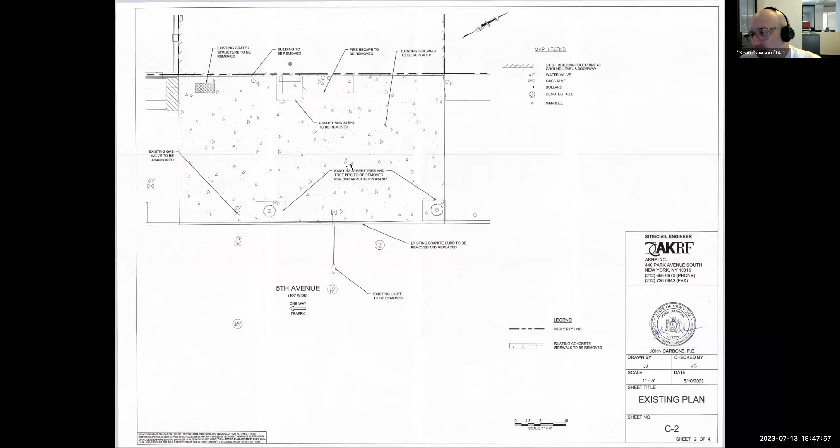Thank you. Anita Brandt. First, a quick question. What are the two X's? What do they mean on the plan that's on the screen? So that has to do with the previous existing conditions to the proposed conditions. So this is the current condition. They're basically just indicating the locations of the tree pits.

And one tree is being eliminated, is that correct? I believe both trees are being eliminated, yes. I'm sorry? I believe both trees are being eliminated. Logistically, given the back and forth with DOT for street furniture, the new street lights that are being proposed, and the spacing of signage, street lights, hydrants, the space is not adequate to maintain those street trees.

And one more quick question. There's an awning that's proposed under a separate application, is that correct? Yeah, that's correct. Part of the original application through Landmarks was a canopy awning at this entrance location. I can't understand. What did you say? I'm sorry. Did anyone else understand it? Maybe it's just me. Say it again.

So part of the original application through Landmarks, there is a canopy or an awning over the door at this main entrance portion, basically over the top of the same location as the snow melt. That has already been previously approved through the larger Landmarks application. That's what I wanted to know. Thank you. All right, Albert Bennett.

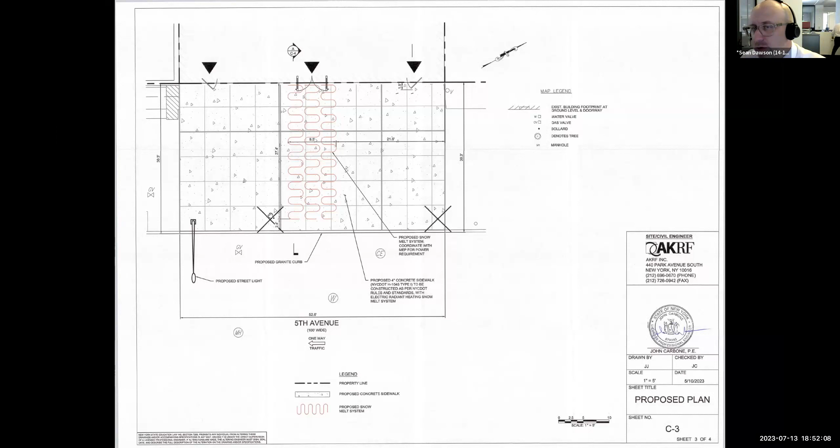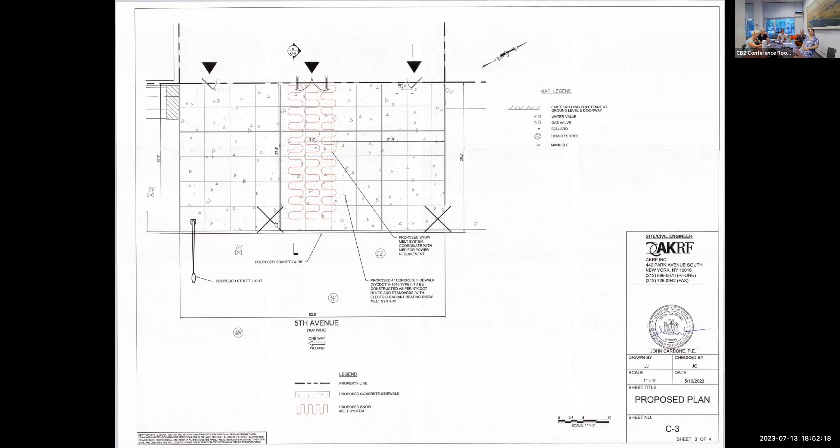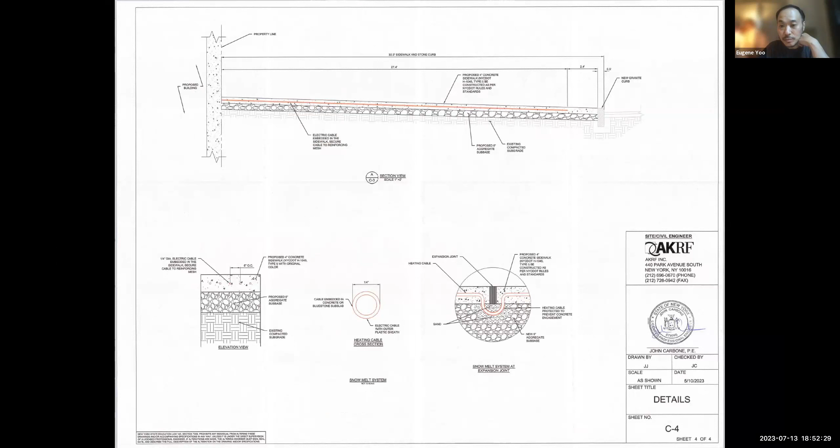Okay, are there questions from the public? Yes, there is one question. Eugene, do you see the raised hand among our attendees? Yes, Susan, I do. So Jeffrey Rowland has a question. Jeffrey, I am going to promote you to panelist if you would like. No, I don't need that. I'm perfectly satisfied with just speaking. You can hear me, I hope. Yes, we can hear you, Jeffrey. Okay. I have several things that I would like to say, and some of them are questions that will need to be addressed.

The first thing I would like to make the committee aware of is there was an article yesterday in the Times about the underground temperature in Chicago having risen by 5.5 degrees in the last 50 years, precisely because of the heat produced by buildings and the basements of buildings. So put that aside for a minute. That is something to maybe talk about.

If there is an awning in front of this building, what is the need for the ice melt under the awning? It seems to me that it's redundant, and it may contribute to the heat of the ground, and that has an issue in terms of shrinking and swelling the ground and raising and lowering buildings and actually causing cracks in adjacent buildings. That's something I'd be concerned about. Two, I would like to know what the power is used in this. What's the wattage and the amperage for the entire feature, and how will it be addressed to age?

In other words, people get electrocuted sometimes with salt and things like that that get spilled on the sidewalks from other buildings or tracked there by boots and galoshes. And should the decay happen to the wiring, there could be electrical leaks. I know somebody personally that was electrocuted trying to save their dog over in the East Village, Jodie Lane. Some of you may remember the famous young woman that was electrocuted saving her dog because her dog was getting electrocuted. She went to rescue her dog and she herself got electrocuted. And this from Con Edison's electric leaks.

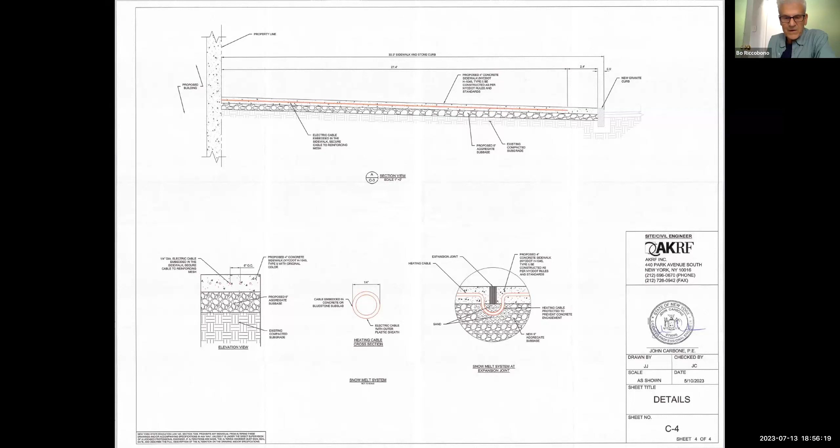Okay, thanks. The next application is 38-42 Commerce Street. Chanel, excuse me, Chanel, Valerie De La Rosa has a question too. Yes. Does Local Law 97 or Local Law 84 or 87 cover any of the heated sidewalks? Have you had to look at those to address this? And then I just have a general statement. My understanding is this is all electric, and those are concerned with carbon uses. So thank you.

And I would just say a general statement is if I understand this isn't a historic district, and this is just a general comment as part of being on the committee. If we're not here to comment on the trees being removed or the energy use underneath the sidewalk, then does this need to be looked at by another committee? I just offer that as a question to the committee to think about for business session. Thanks. Thank you, Valerie. That seems to be it, Chenault, so we can move on to our next application now.

Okay. Thank you. Eugene, if you'll rearrange the presenters. Yes. 42 Commerce Street. The application is to install a new entry infill, signage, and to repave certain areas. Yes, so this is 38-42 Commerce. So I will be promoting Erin Ruli. If there is anyone else associated with 38-42 Commerce, please raise your hand so I can promote you as well. Okay, so we have three people rejoining the meeting as a panelist.

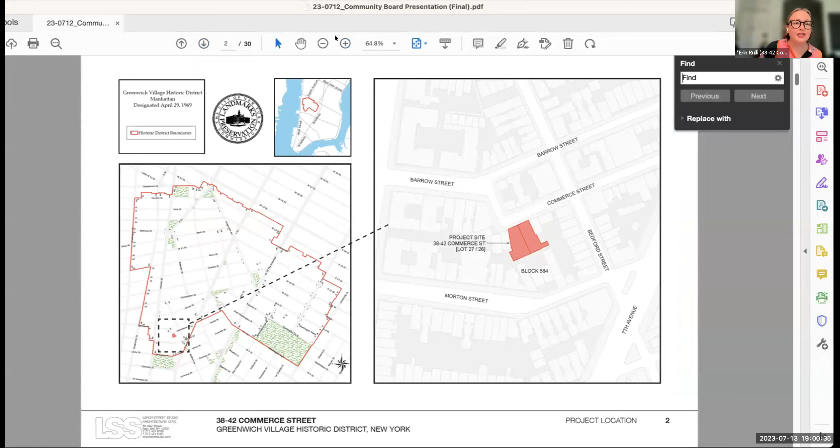The application is actually for two separate buildings. It's 38 to 40 Commerce Street and then 42 Commerce. Those are buildings located on the south side of Commerce between Bedford and Barrow Streets in the Greenwich Village Historic District, of course. Here we see the overall scope of work, the existing conditions on the left and the proposed conditions on the right. As I mentioned, these are two separate buildings historically. The building on the left is number 38 to 40. That's primarily the theater building. And then the building on the right is number 42.

That historically was a restaurant associated with the theater and then was converted to a black box theater later in its life. But originally constructed as early to mid 19th century buildings, and then converted to a brewery, and number 42 was a stable. You all likely know the history of Cherry Lane. It was a longstanding off-Broadway theater. The property has recently changed hands, and A24 is the operator. It will continue to operate as a live theater venue, as well as hosting screening events.

As part of this proposal, interior work converts that black box theater back into a restaurant, much in keeping with its historic condition. The intent here is to really have a very light touch. It's a minimal intervention that's inspired by the historic condition. We'll see that throughout the presentation. And all of the interventions are to non-historic or non-original conditions. So just briefly to run over the scope, there's new infill at the stable entry at number 42, which we see here. Can you see my cursor on the screen or no? Yeah, oops, sorry.

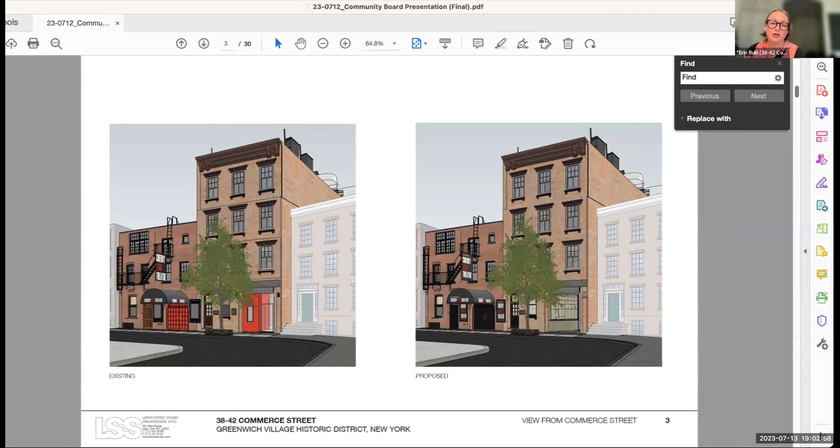Replacing the window at the center bay here. It's currently a vitrine. There's new poster boxes replacing the existing, recladding the existing canopy, and then new signage and branding associated with the proposed theater operation, and then refinishing the existing painted features in a consistent black finish across the facade, which resonates both with the historic condition, but also with the upper floors. And so we'll take a closer look at all of that.

Here's just the overall condition, looking in both directions, east and west. The existing conditions largely result from a 2005 approval by the Landmarks Commission for a theater rehabilitation project designed by Mitchell Kurtz. And so the red box office that we see within that open bay here, the red doors, the doors themselves, all of the signage, that was all approved as part of that project.

So then just looking, I can zoom in here. You just let me know if you want to see something close in more detail. But here's the existing condition at number 42. So looking sort of frontal view, this is the existing box office that was built as part of that 2005 project. Some glazed infill that opens onto the lobby beyond. And then that vitrine I mentioned, which will be replaced by a standard double hung window, and then those poster boxes that flank the existing theater entry.

And then just oblique view looking into the recess, the open vestibule. This was a stable entry historically, so you can see the sort of expressed brick return within the opening. There's some signage in there, and you can see sort of beyond that with the glazed opening. Of course, in off hours, the theater is shuttered, so there is a security grill that extends down, and this signage dates to that 2005 project as well.

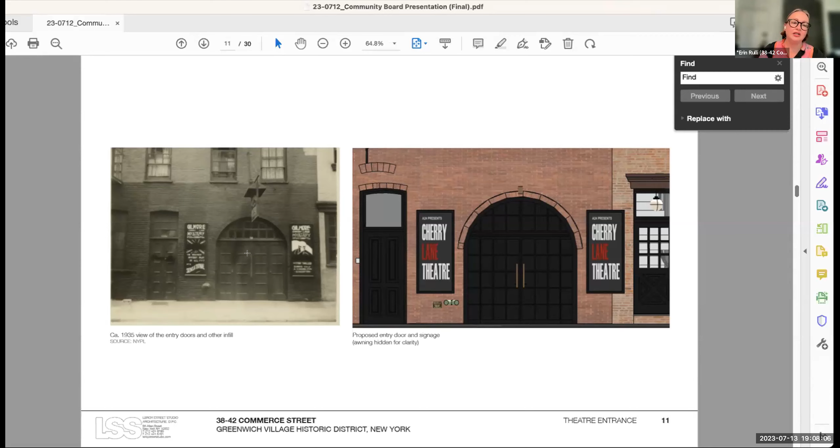And when Landmarks approved the infill, so the doors within this arched bay were approved in 2005, they're recalling the doors that are shown here. So we think that this all sort of brings it into alignment to have the signage and infill to be of a compatible generation.

So in plan, on the left is the existing condition, on the right is the proposed. We can see the masonry opening at the building line, and here's the existing box office, that red box within the masonry opening, and then the glazed entry there, just set back behind the masonry opening, and then that leads to the lobby, and then this is what was the existing black box theater at the rear of number 42.

And on the right, we have the current proposal, which sets back the entry quite a bit more deeply within the volume of the interior space, and creates more of an open reading, recalling that historic openness that existed there. And then the box office and concession stand, it would draw behind the masonry opening. So here you can see that the box office sort of juts out into the opening, but this sort of curves back from the masonry and extends back into the lobby.

And that gives you, again, reinforces that open reading of the vestibule, but that curved form also recalls that sort of historic procession through the space. And then you have the open lobby beyond that, and the restaurant at the rear of the property. There's also an entry into the theater from that lobby space. And so in just thinking about the design, it's really inspired by that open courtyard that existed historically, both as a stable and then later as the restaurant once the Cherry Lane was established.

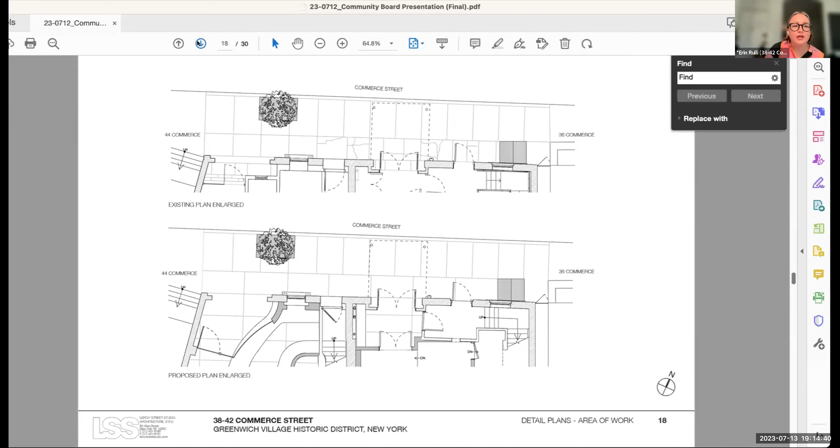Here's the existing box office and entry infill, and we can see how that really opens up in the proposed condition. At the building, there are fragments of bluestone paving that exist, and we see that here in green. They're also represented in the photographs above, but it's really fragmentary and they're in very poor condition. And then it's surrounded by concrete.

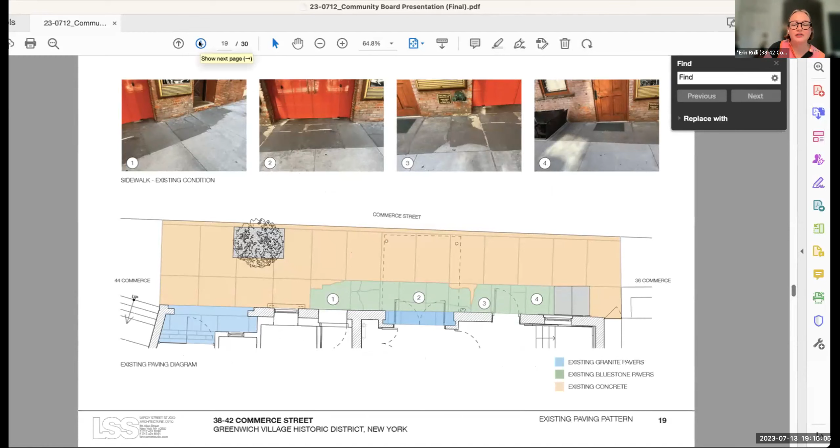And then at the thresholds, we have some granite that was part of that 2005 project. And here's the proposed condition. So a new line of bluestone paving all along the frontage of the building and leading into both the theater vestibule and the open vestibule leading to the restaurant and the primary lobby. And so really just extending the experience of the openness of the original stable condition and the original restaurant, and that permeability between the theater and restaurant and the street.

And here's just an overview of all of the materials that have been selected. The unlacquered brass light fixtures. We have the black paint for all of the painted surfaces at the ground floor, and then the infill, green glazed brick, to give texture and reference to the existing brick with a subtle contrast and recession within the opening.

This is the slide I'll leave you on, but here we see the evolution from the pre-designation photo showing the existing condition at that time, how we experience the building today, and then on the right, the proposed condition, which, as you can see, has a very light touch and is minimal in all regards. So with that, whatever questions you might have, I'm happy to answer.

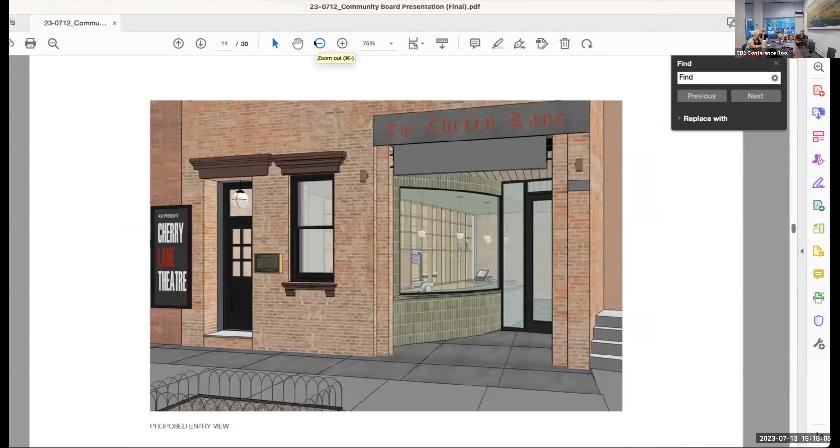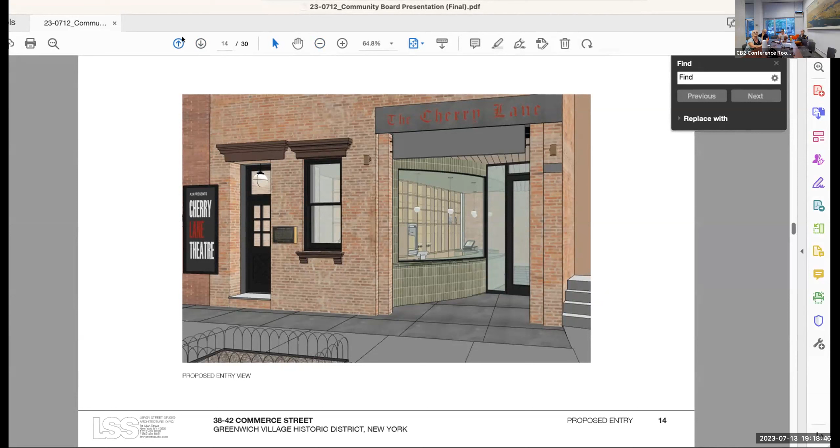That's it. Thank you, Susan. Okay, Anita Brandt. Yes, thank you. I have two questions and also a general comment. I think it's really very nice. I liked it, so congratulations on that. And I also like the way you handle the bluestone. My questions are, number one, would you consider finding a way to recess the grill box? We're trying to get away from those boxes that house the grill. And the second is, are all the windows on the actual facade existing, and are they wood?

Okay, so the grill box, are you talking about the poster box? No, the roll-down grill. The grill box is, let me go to the section. Okay, so the grill comes down behind the masonry opening. So it's recessed from the plane of the facade, but it is directly behind the opening. And from a security perspective, it's important for the operator not to have an open vestibule during off hours. Of course. No, I'm asking, why can't you recess it up into the ceiling so you won't see the housing?

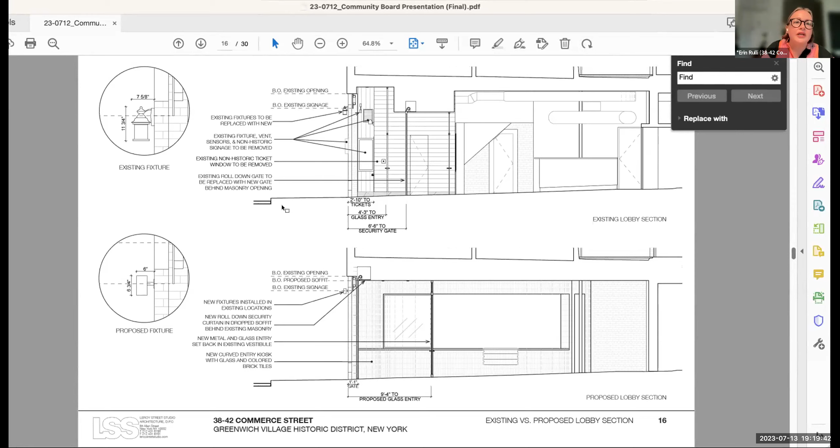I'm sorry. In fact, it's recessed up into the ceiling here, and then there's a signage bracket that extends across the whole width of the facade that's occupied by signage. So that'll all be housed. It won't be visible in any way, and it'll have a clean appearance on the interior when it is open. Well, you made the sign look like a box on the renderings. Anyway, I understand it now. Sorry, this is Morgan here, from Leroy Street Studio.

It's an existing sign there, which, yes, there you go. Yeah, so let's see. There's maybe this one. Your rendering has the sign above it. Yes. So it's almost like theatrical bracing that exists within that opening. I'm trying to get to it. There you go. So you see this framing exists there, and then it mounts banner signage on it based on whatever is happening at the theater at that time.

And so that's remaining. And what you're going to have is, let's see if I can jump to this. What you're going to have is this condition at the street. And you can't really see, but the ceiling level is 8 inches, a foot above that. So it'll all be housed up in there. You won't see an expressed housing. I think you understand my comment, right? I do, yes. And your answer, but I think this would be a good time to make an improvement there, in my opinion. And the wood windows, are they wood, and what's the wood?

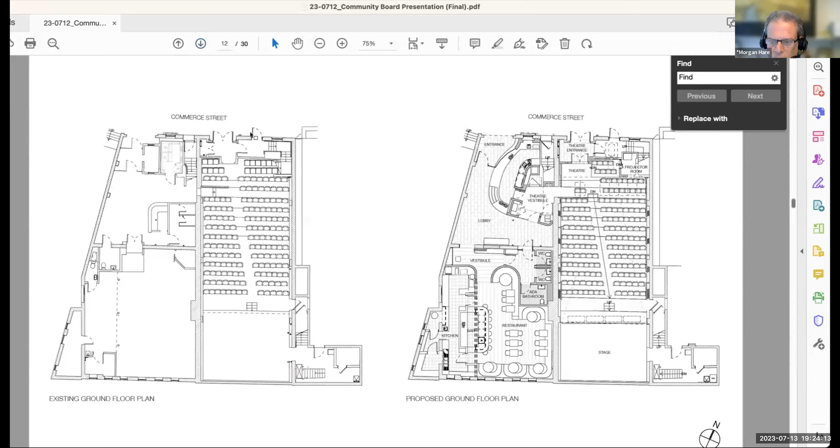Okay, Brian Page. Thank you. Yes, it's a great presentation, and generally, I think it's a big improvement. 2 questions. One is, aren't you required to have the egress door from the apartments to swing out? Morgan, do you have that one? Can we go to the apartment? Oh, sure. The plan. That's the best place, right? I was going to say the photograph, but that's okay too. Oh, yeah, right. I mean, we're not touching any work there. This is the existing. But yes, you're right. It is a requirement.

Yeah, you're touching the entire facade, so I don't think you could use that as an excuse to not improve the safety for the apartment. Yeah, no, it's purely an oversight. We're not doing any work on the apartment because they're rental units. So yes, you're right though.

My second question is on the box office of the new plan. I didn't see any openings in the glass facing the outside. That is outside of the entry door. So we're using the new double hung window as the box office on the street, as opposed to the old version where the box office was in that red box. Was the opening in the red box. The curved section is solid glass. Correct. Right. Thank you.

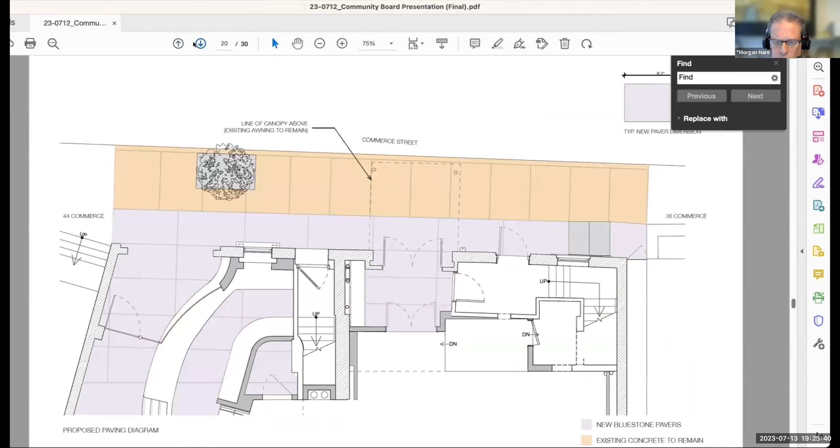Thank you. While we're on the curved section, I have a question about the green glazed tile. What is the finish on that tile? It's kind of a matte finish. It's bison brick, which, do we have a photograph of it? Yes. There it is. And it's kind of a matte glazed. You've got it over on the right there.

Sorry. There you go. Can you see that? Yeah. It's a matte glazed brick tile.

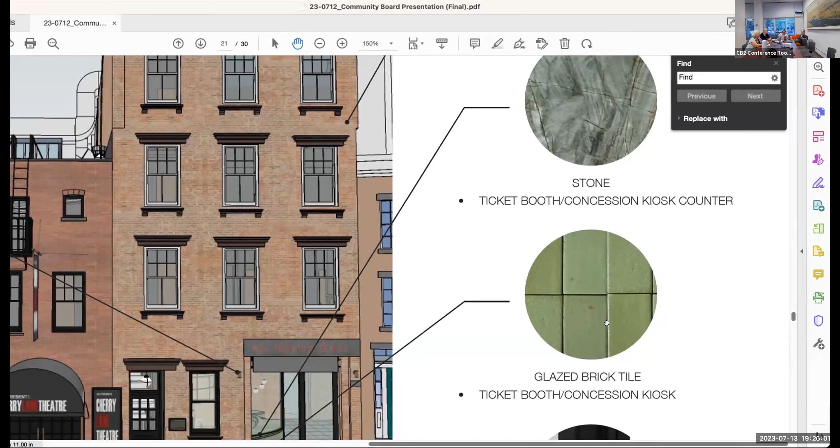Okay, thank you. And I have one other question, which is in regard to the brass light fixtures. What is the inspiration for those fixtures? They look a little contemporary. They are; it's a little more contemporary in look than what is there now. They're a nicer fixture. The fixtures that are there now, although they appear historical, are a little flimsy. They're not great. They're sort of dented too; people have hit them over time. They are very flimsy. Yeah, no, my question isn't in regard to the existing ones.

It's your choice of. Yeah, we like these because they were a bridge between the existing fabric and the new theater. It didn't feel like it was too modern, but it's not overtly traditional. And they're also just scaled down. They're compact in profile and projection, and have a minimal impact on the overall aesthetic. Thank you very much.

Albert Bennett. Yes. So basically, we are losing a black box and gaining a restaurant. Is that correct? Well, I would say that the black box was established in the 1990s. You are gaining a restaurant, but it was historically a restaurant. From the inception of the Cherry Lane, it was always a restaurant until I believe the 1990s. It might have been transitioned before that, but it was very much a pet project of the previous operator that created that space in the back.

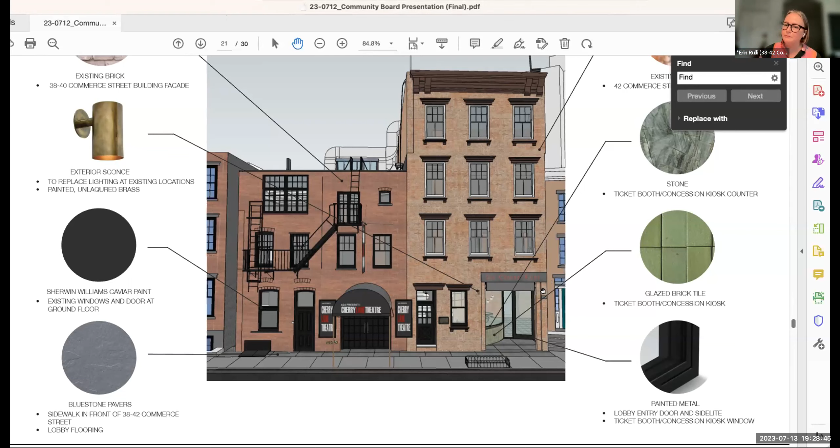Exactly. Let's get to that view. This one here. Yeah, so it's all very subtle and understated, but very much in the experience of how you walk Commerce Street, right? If you experience that curve, it feels like the right place and the right level of identity. Even though there has been much more signage over the course of the building's history, this is very much resonant with the place, I think.

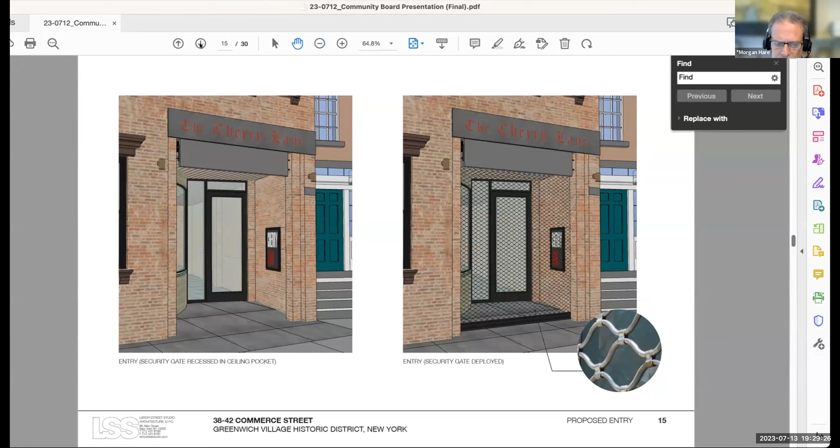And unfortunately, I'm sorry, we didn't get the image of the sign on this rendering. The one on the building, the right. It's essentially, oh yeah, this is the impost of the pier, but it's essentially that level of signage. Let's see, do I have it in the historic photograph? Yeah, there it is. There's a little plaque sign on the pier, and that's what we would be recalling. Okay, thanks. Have all the questions been asked?

No, they haven't. Susan Kent, followed by Brendan. Thank you. My question is somewhat similar to the previous one. That black box space that you are now converting, was that an active theater space that you're now sacrificing? Or was that just a rehearsal space? It's just that a theater giving up theater space is kind of surprising.

Up until the transfer of the property, I don't know how active it was prior to the sale, but it was constructed as a black box space. I couldn't share with you the level of activity of how programmed it was. But it's not actively programmed. Is that the reasoning behind replacing it? Morgan, do you have clarity on that?

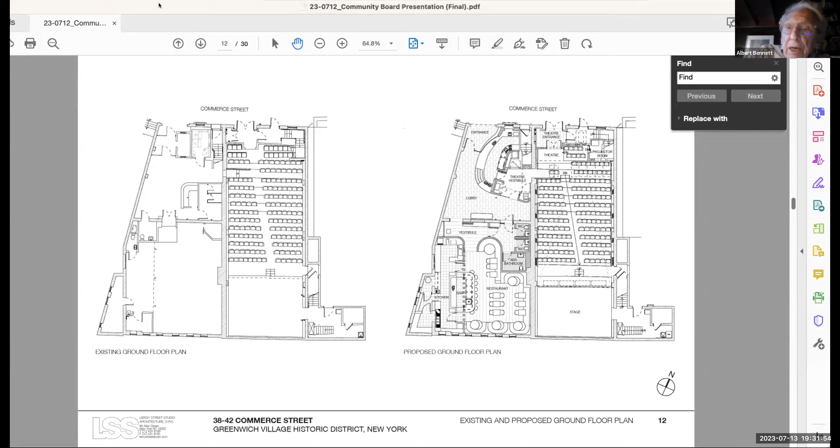Could I speak to that? Every play I've been to has been in the other theater. Right. Me too. Okay, could this be the last on the question of the interior? Albert, please. This is not a question. I just want to state that not very long ago, a friend of mine from Chicago came to perform in that space.

Okay, thank you, Albert. Wait, I think we have all apart from— sorry. Mary Gerloff, who is a long-standing part of the Cherry Lane institution. I don't know if she can raise her hand and speak. She could speak to how that space was used, up to the most recent history, if you desire. Yes, and Mary Gerloff is in the panelists, so she can definitely speak. Mary, maybe just raise your hand.

She's telling me it was an active space. So it's an interior question, and we should move on with what's before us. She is saying that it was an active space, but we know that this is an interior use question, so we'll move this along. And Brenden Fitzgerald has been very patient. Brendan. Thanks, Erin. I have two preservation questions and then one design question.

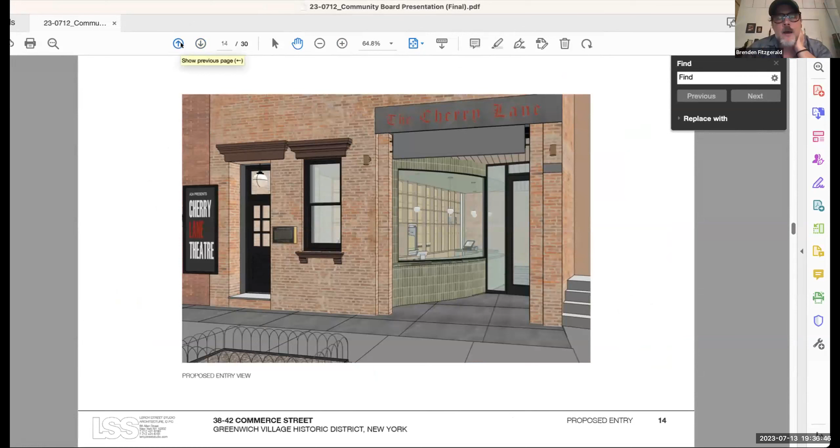But there is one, I'm not sure where it is, but it was red letters with a white highlight, I think. Yeah, that was a rendering that y'all made, right? Yeah, I'm not sure, that's a possible treatment. No, that one is just showing the red. Okay.

And then moving next is the entrance way. I just want to confirm that glazing is slumped, curved. And then I guess my question is, is that critical to the design vision? Certainly it does pronounce that it's not part of the historical building, which is good. I'm just throwing it out there. Again, I don't have an answer to that.

You're asking about the glazing itself or the whole wall? Oh, the wall, I'm actually talking about the glazing itself. It is slumped and curved, right? Yeah, that is correct. I just wanted to bring that up. Right. We looked at it as segmented, and it just felt like it was a third thing. Faceted. Yeah, faceted.

And it just felt the curved form really kind of signaled this new box office piece as a piece separate from the existing fabric. Okay. Thank you. I see that Mary Beal from Cherry Lane Theater has joined us. So Mary, please go ahead.

Hi all, nice to be here. My Zoom froze, apologies. I'm here for any questions about the theater. I believe there was a question about the studio theater being active to the public, I think was the question. Yes, from about 1996 to 2022, it was an active studio theater. Thank you. You're welcome.

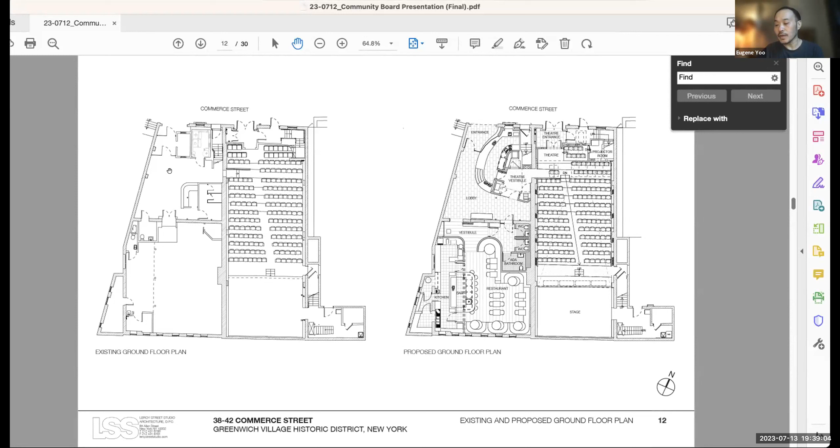All right, Chanel, there are a couple of members of the public who would like to speak. Okay, I'll just go through one by one, please. Sure. So Jeffrey Rowland is first and Pete Davies will be next. Pete, I will be allowing you to rejoin as a panelist if you wish. Jeffrey, you can speak as last time. Thank you. And Jeffrey, you're first. Okay, thank you.

I listened to this very proposal in front of the SLA a while ago. I don't see many changes that are significant. I thought it was excellent then. I think it's excellent now, and I think historically appropriate. I might add that I think you'll find looking around in the village that almost all historical residential entrances actually open in. The commercial ones open out. I don't think it's a requirement that the residential ones open out, or otherwise my building and every building I know on the block would be in violation.

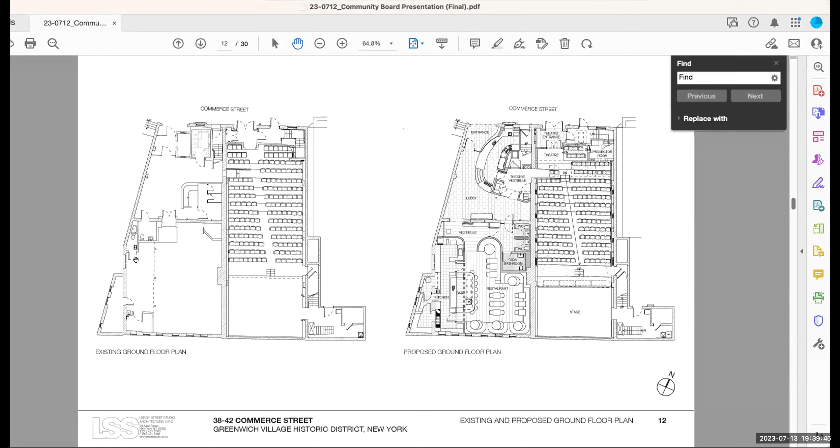I think that the signage, the Cherry Lane sign that's faded, I'm in favor of restoration to the current condition. In other words, not some previous signage, but the current one just restored to its condition, so that it will in fact be able to endure over a long period of time. I think if left in the condition it is now, it likely would fade away to the point that nobody would care that it was there. And so I'm inclined to say restore. Thank you very much for the time.

Thank you. And Eugenia, Pete Davies is next, yes? Yes, you're right, Susan. Thank you, Jeffrey. And Pete, I see you on the screen. Very good. Thank you very much. Could you put up slide 16? This one? It's different. I'm so sorry, what was it, Pete? It's the one where side by side you see a photo of the poster with the red arch door to the left. Oh, yes. There you go. And on the right, you see the rendering.

Okay, so I'm confused because on the left, that photo shows the width of the 40-42 portion of the building that's behind the sign to be 1 brick wide. But the rendering shows that portion of that same building to be 2.5 bricks wide. And all of your renderings show that extra width, whereas the photo and Google Street View show 1 brick width. So with what you show now on the rendering, the division of the buildings kind of meets middle-ish of the poster, but when you lessen the width of that poster box, it's going to sit differently. I'm just confused as to why your rendering doesn't comport with the actual situation with the facade.

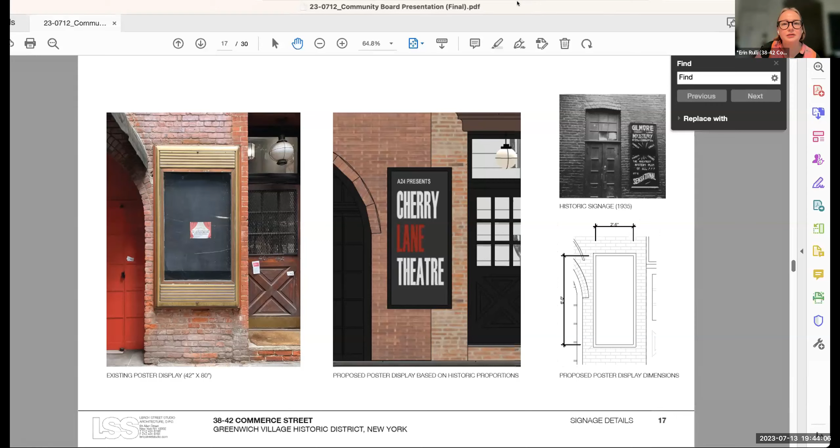Should I stop sharing now? Is that? Yes. Yes, thank you, Erin. Thank you. If you would rearrange people, please, Eugenia. Thank you. Yes, we'll rearrange the deck chairs.

So the next application is 829 Greenwich Street to alter the facade and construct a small rooftop addition and rooftop solar panel canopy.

Yes, so I am promoting Jonathan Taylor for 829 Greenwich. If there is anyone else in the attendee list, please raise your hand for 829 Greenwich. Okay. Yeah, this is Jonathan, and Alexandra Barker will also be one of the main speakers, so for sure, I want to make sure she gets promoted. Yes, promoting 3 additional speakers. Okay, good. That should cover everybody. Thank you. I'll go ahead and share. And so should I begin? Please do, thank you. Great.

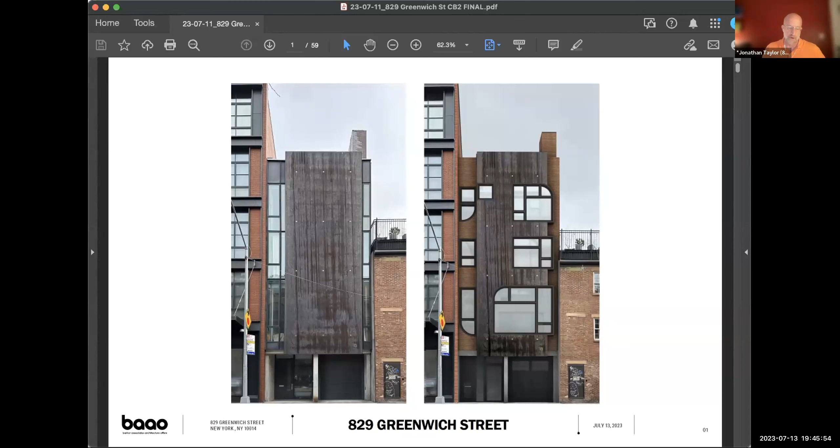Hi, I'm Jonathan Taylor with Higgins Quasebarth & Partners Preservation Consultants. I'm joined by Alexandra Barker and Annie Paz of Barker Associates Architecture Office, as well as my colleague Erin Rulli, who you just heard from. We're here to present modifications to 829 Greenwich Street, which is a residence that was approved by the Landmarks Preservation Commission in 2003. The modifications are part of a project that was conceived to comprehensively address building performance issues inherent in the original curtain wall and steel plate facade design.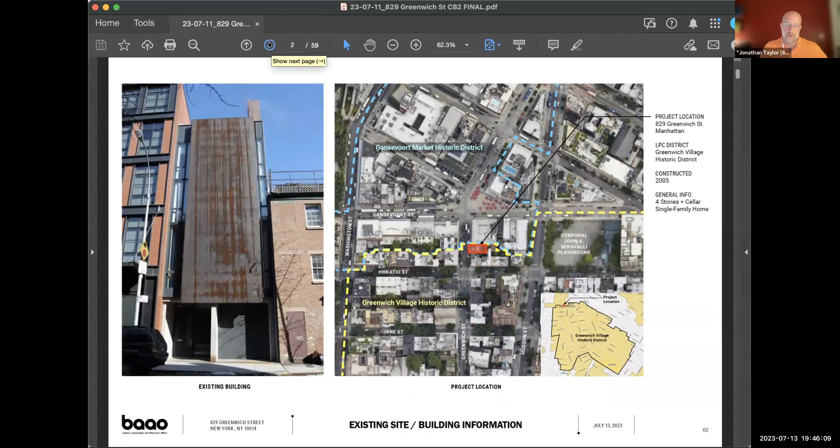The house is located between Horatio and Gansevoort Streets, on the Greenwich Village District's northern border with the Gansevoort Market Historic District. These are a few street views of the building on Greenwich Street. The street facade is composed of a steel plate that is set asymmetrically forward of a curtain wall window system that runs up each side of the facade. At the ground floor are a deeply recessed entry and garage door.

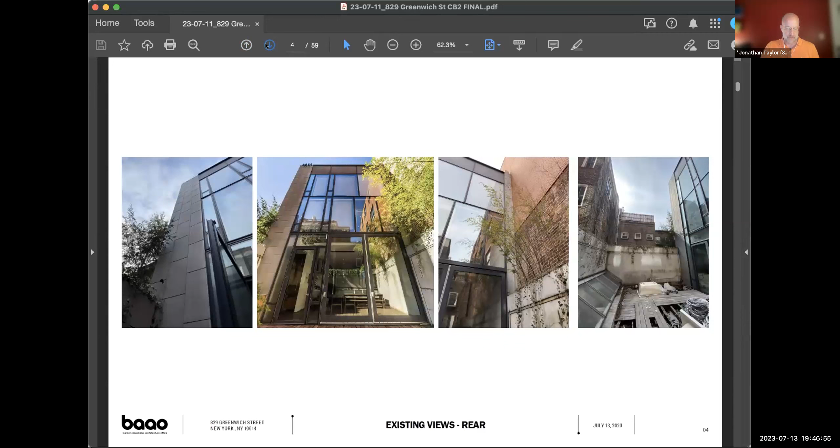And as you can see on the right, the south side elevation is partly visible with a red brick chimney and a large angled skylight. At the non-visible rear of the building, the rear facade is largely made up of a massive window wall. And there's also a small rear yard with skylights to the basement. Repair and replacement of the decking and skylights are being reviewed by LPC at staff level. Some views on the roof of the building with the existing large skylight and the existing chimney. There's also non-visible mechanical equipment that's going to be replaced.

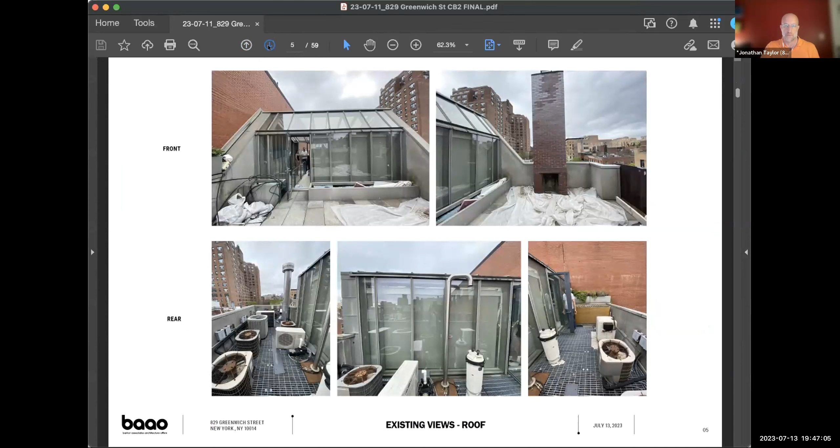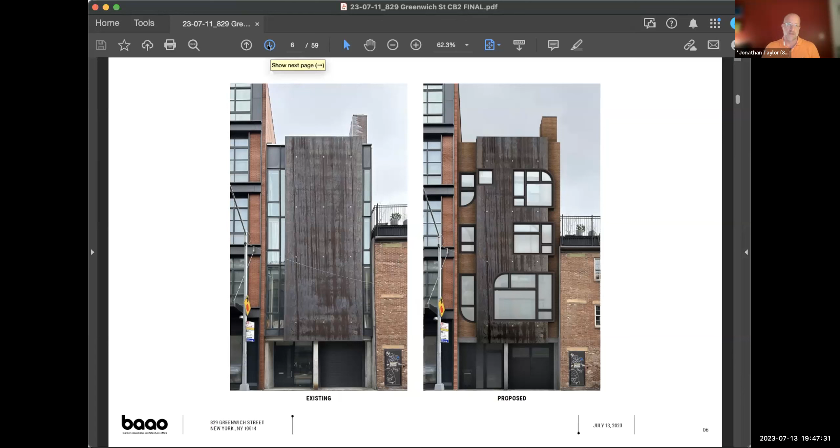Alex Barker will discuss the proposal in detail, but I did want to show a few overview images of the project before briefly discussing the site history and context. The proposal entails on the front facade introducing new larger window openings that intersect with the steel plate and cladding the setback portions of the facade in brick. The entry infill is to be brought somewhat forward, but remain set back from the facade. And just a couple of other street views of the proposed rendering.

At the rear, it's proposed to replace the window wall with a stucco-clad rear facade with punched openings for windows that echo the design of the front facade. The angled skylight is to be replaced by an angled solar canopy. And at the southeast corner of the rear of the building is proposed a small greenhouse, also with a sloped roof. And that will be visible only from limited vantage points, which we'll show you later. And this is just another angle view onto the rear.

So just some facts about the site. It was originally occupied by a mid-19th century townhouse that by the early 20th century had been highly altered for industrial purposes. You can see it on the tax photo on the left with very large openings. By the time of designation of the district, the building was described as being completely stuccoed over at the front facade. In 2003, the LPC approved replacing the deteriorated shell of the former building with the existing residence.

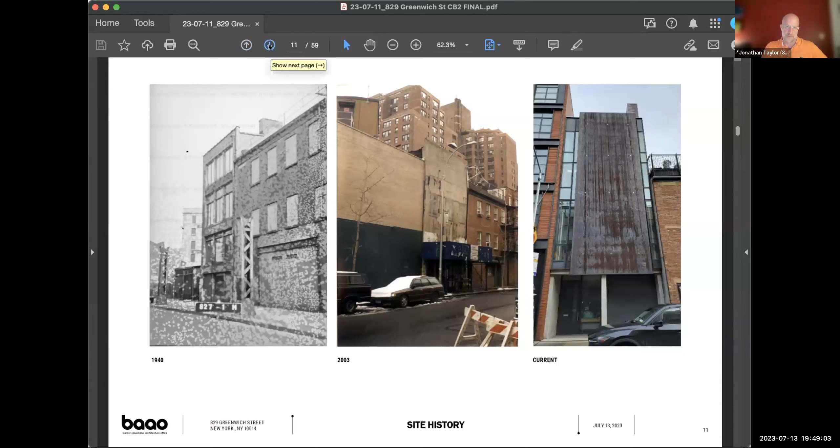And this approval of this striking design was an example of the Commission's approval of proposals for new buildings in the district that reflect in contemporary design the variety of building types and materials in the district and the way that buildings have evolved over the long history of the district. And this history of evolution and variety in building types, particularly in the Far West Village, also informs the proposed interventions. So just a couple of slides about this context. As I think we're all familiar with, historic examples of the way that the district's earliest buildings have visibly evolved over time include dramatic intervention in the facade of studio windows, like you see on the left, and modification of stoops and entries that result in new arrangements of windows and doors.

And at the right, we see the combination of two early row houses into an apartment building in the 1920s, where you can still legibly read the original houses, but you also see they're now an apartment building, and there you see the two houses amid alterations such as the new arched windows that sit below the straight lintels at the ground floor.

And then also over the course of the district's history, the succession of architectural styles, new building types such as tenements, and the comprehensive redesign of original houses with completely new facades and eclectic styles also contribute to the visual variety of the district. And additionally, in the Far West Village, the prevalence of industrial buildings, both purpose-built and adaptations of earlier buildings for industrial uses, further contributed to the visual variety, often with large and irregular window openings that suited the purposes of the individual buildings. And all of these contributors to the lively variety of the district have been considered and even celebrated by the Commission in approving new and significantly altered buildings.

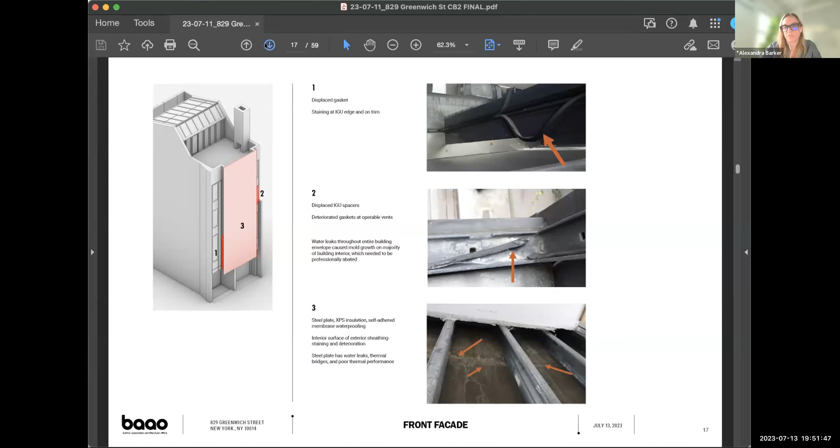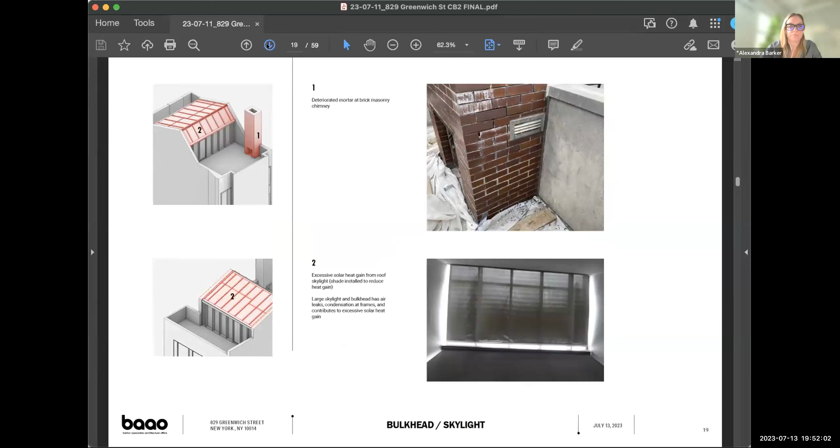The glass curtain wall at the rear facade shows more of the same deterioration, water, air leakage, and thermal bridging problems. At the roof, the large skylight also had water leakage problems and produced excessive heat gains. At the parlor level roof terrace, extensive water leakage was detected through the roof and skylight.

Returning to the front facade, we did an extensive review of the DOB requirements for the structure. We determined that the bedrooms at the front and the top two floors do not meet the minimum legal requirements for light. Habitable living spaces like bedrooms and living rooms require the area of an operable window to be at least 10% of the area of the room. In this case, the windows indicated here are required to be 12 square feet at the very minimum. One of these windows is 8.2 square feet, while the other is 7.4 square feet.

These small openings are also recessed behind the plane of the steel plate facade, which restricts the amount of airflow. Although the size of the openings meets the minimum requirements for air, this inadequate airflow was likely to have exacerbated the mold problem that developed in the house. The recessed spaces at the entry door and garage doors are deep enough to be used as shelters by transient individuals, creating a safety hazard.

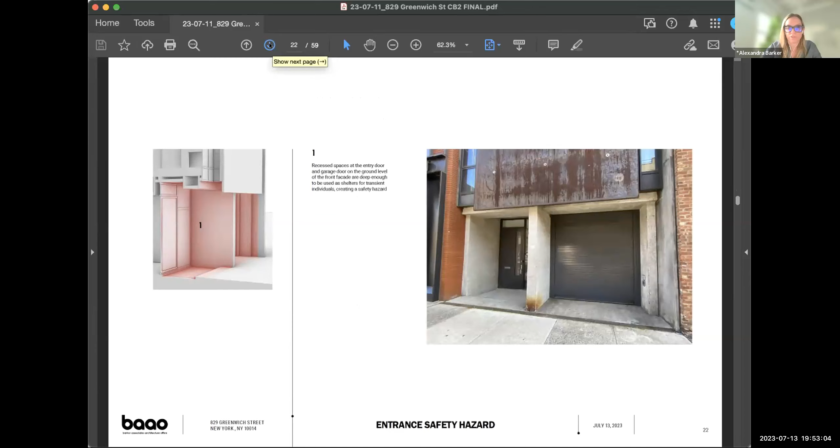So we'll now return to the design proposal. We're proposing changes to the front facade that seek to address some of the deficiencies we've outlined. We're proposing to replace facade systems that were at the end of their lifespan with ones that greatly improve thermal performance, air and water tightness, and provide long-term durability. The deteriorated curtain wall glazing is replaced with a brick wall with punched openings. We're also proposing to create punched triple glazed window openings in the steel facade that will greatly increase natural ventilation and light to meet code requirements.

Our design builds off the long history of alterations to existing structures in the Greenwich Village Historic District that Jonathan outlined, whereby new apertures with different proportions and rhythms can be seen layered onto the original facades. As we know, enlarged studio windows and windows of different shapes that reflect different architectural styles, time periods and evolving uses have been added to existing structures, and this layering of facade elements is part of the fabric of the neighborhood. Finally, our window design plays off of the floating nature of the steel plate.

The existing steel plate does not align horizontally with other elements in the facade or with elements in neighboring buildings. It sits in its own plane. In our proposal, we build upon that idea by intentionally floating the new openings in the plate in a different plane and sliding them to create their own independent alignment. The intersection of the windows, the steel, and the brick facade build upon the existing facade's layered configuration.

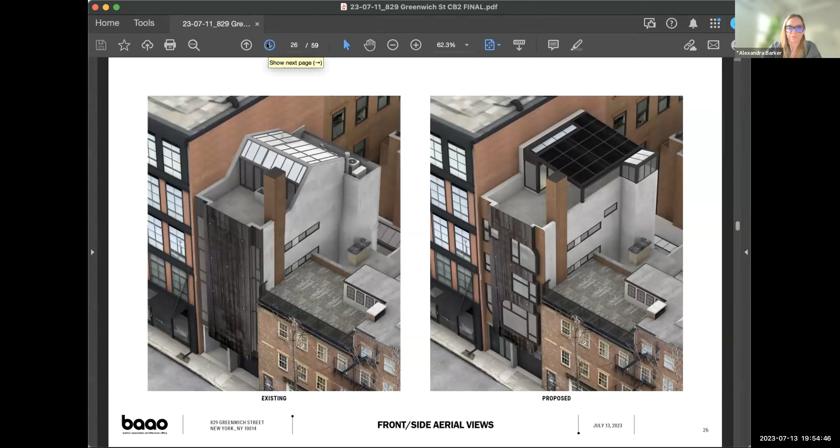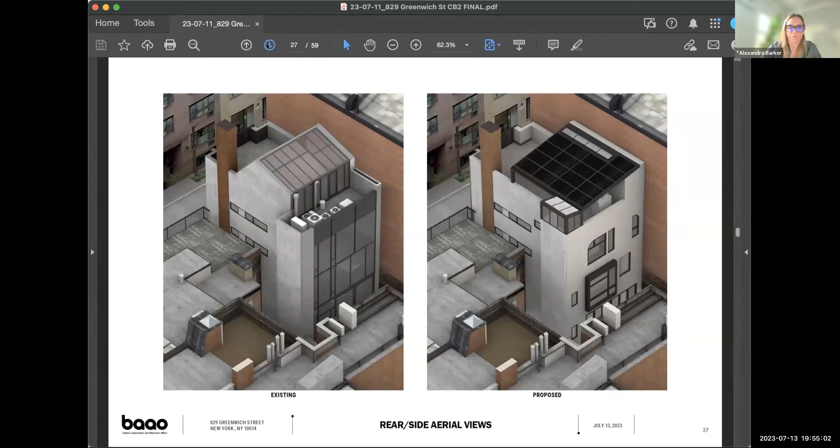The replacement of the roof skylight and the addition of solar panels is in keeping with changing building department requirements to move the city away from a dependency on gas. The shift to electric fuel is part of an effort by the owners to follow the increased thermal performance characterized by a design approach called Passive House, where the building is designed with a tight thermal envelope that dramatically reduces heating and cooling loads. The angling of the greenhouse roof is configured in order to capture rainwater within the boundary of the property.

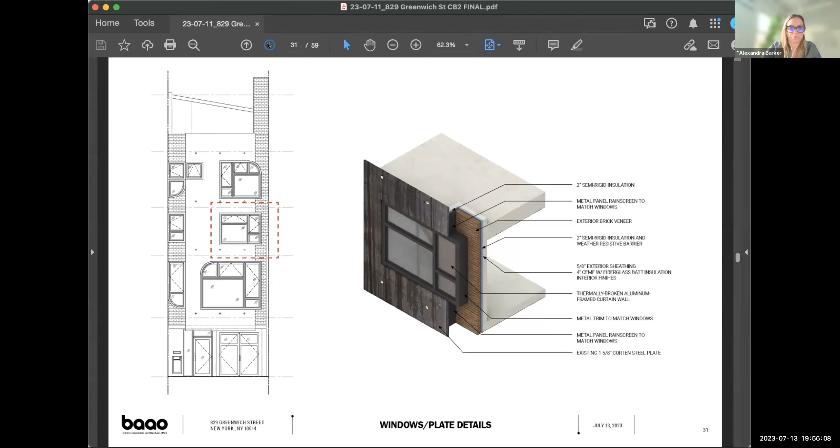In these wall sections, you can see we are adding continuous insulation as well as a fire barrier behind the steel plate. These details of the facade shown in plan demonstrate the existing and proposed conditions. In the proposed, the added insulation now continues across the entire facade behind the steel plate, its aluminum capping, and the brick. In this detail, you can again see the new window located behind the plane of the steel plate and the new insulation.

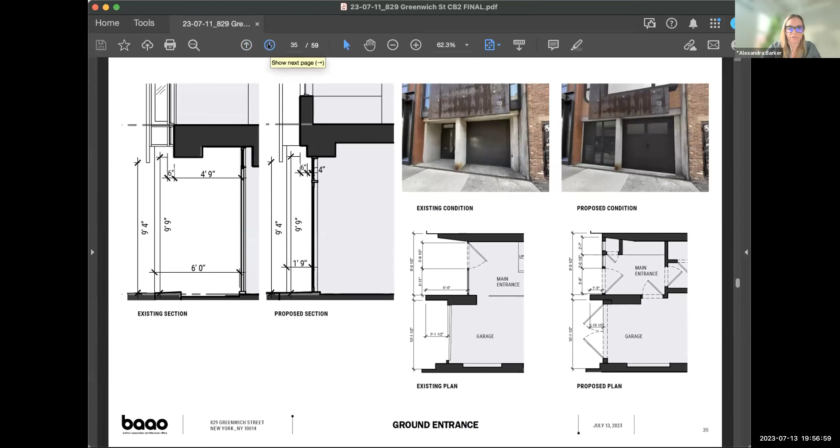These sections show the existing and proposed relationships between the building envelope and the covered exterior space at the entrance level. In the proposed, we are moving the plane of the building at grade forward to minimize the covered space outside so that it does not create such a large sheltered area. We are still preserving the setback from the primary facade.

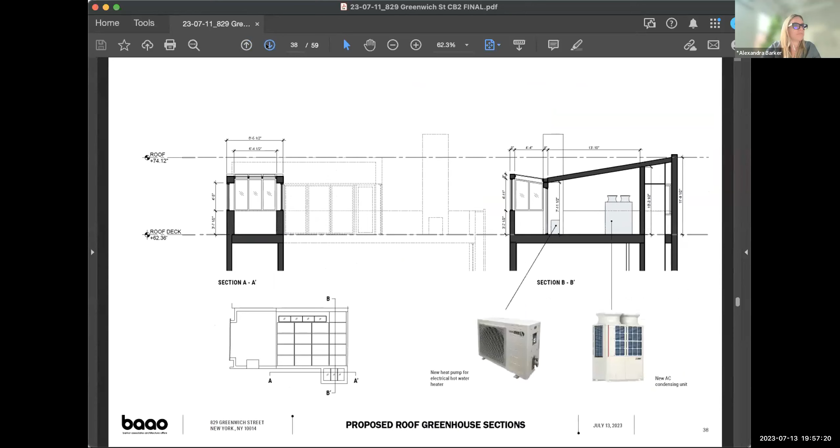The existing conditions of the roof are detailed here. These are the proposed configurations. We're replacing the large skylight with a bulkhead for the stair and a solar array that covers an exterior space. At the rear of the roof, we are proposing a small vertical extension that will serve as a greenhouse. Here, the changes to the roof level are shown in plan. The skylight is replaced with an exterior covered terrace. This plan of the top view of the roof level shows the proposed solar array replacing the skylight.

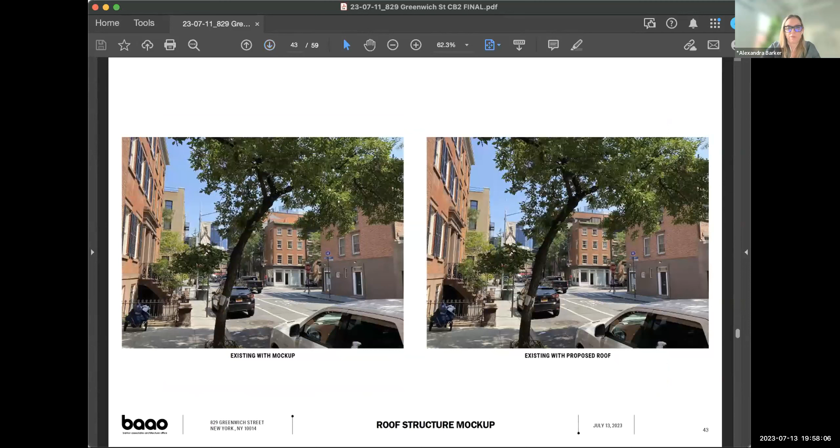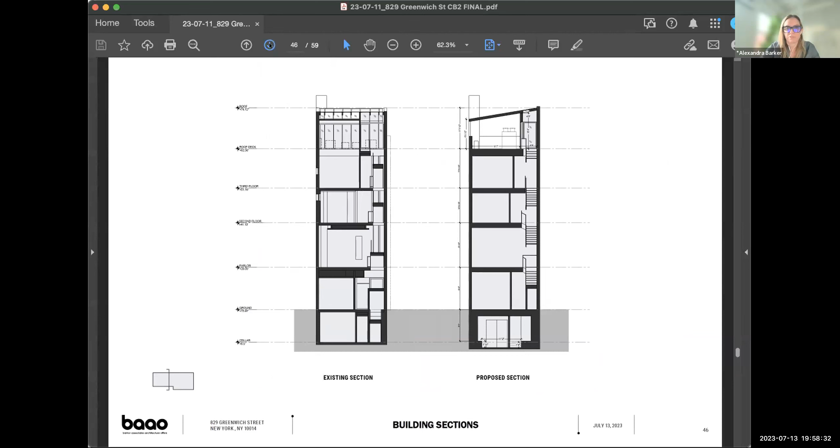Here we are detailing the proposed changes that are following passive house standards. Generally speaking, passive house structures are designed with a tight building envelope with maximized insulation to reduce heating and cooling loads. They're detailed with continuous membranes that minimize air leakage, and the solar array generates energy. The building envelope becomes thicker to accommodate insulation and thermal membranes. All windows will have triple glazing for added thermal performance. Mechanical air circulation allows filtered air to move between inside and outside during times of the year when natural ventilation isn't desired. Gas services are removed and replaced with electrically powered equipment in accordance with Local Law 154.

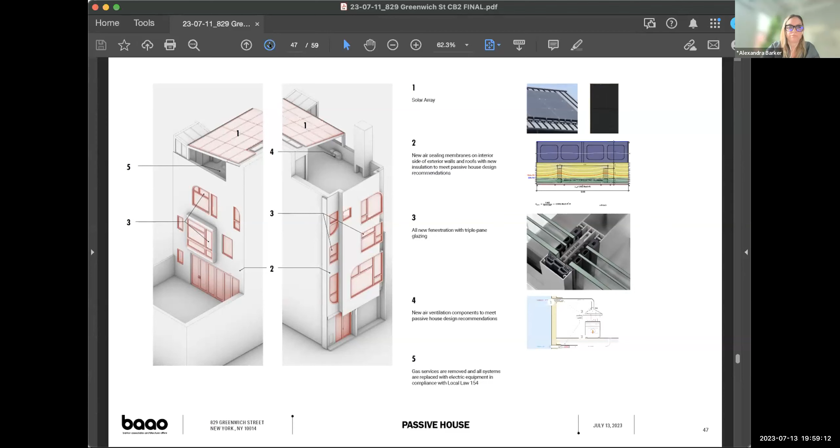Secondary enclosure details. Here are the enclosure details for the rear facade showing the added insulation and building membranes. And these are the roof assembly details. And finally, there's more information about the project, including the appendix, which we can go through if there are questions.

Thank you. Thanks, Alex. I'll just run back to overall views.

Thank you. Okay, thank you. And I don't think I have any questions. So Susan, can we begin with the? Yeah, Brian Payne. Thank you.

Well, I was certainly impressed by the work that you've done. Very thorough. It seems like a total gut renovation. And I can see the amount of care that's been taken for all the details and especially the passive house aspects that will greatly benefit that owner. I would say that the one thing, actually I have 2 points or 2 questions.

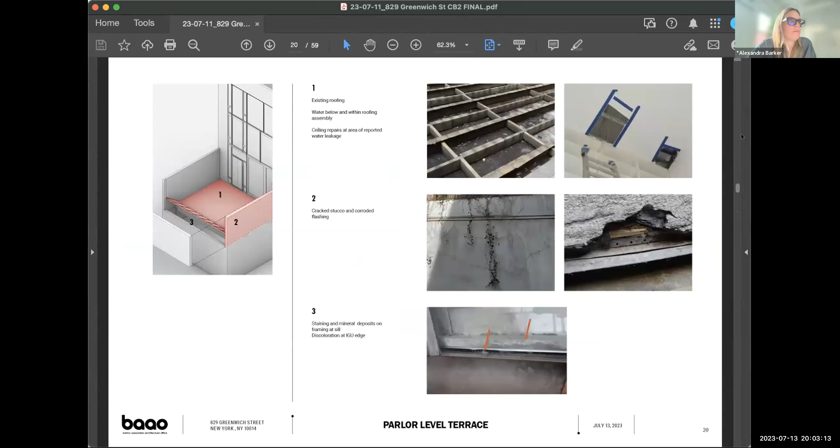I mean, I think that's certainly possible. I would say that we were, in particular, looking at 70 Horatio, which was one of the buildings that Jonathan showed earlier, that you can actually see from our site. And also, 70 Horatio is basically right at that intersection of Greenwich and Horatio. But where those pictures were taken, where you're looking at the building, I was standing right in front of it. And then also the 727 Washington Street.

I think that we were trying to kind of play off of some of these more, I guess, sort of playful and unusual, irregular shapes that have been approved in the past. Is that it, Brian? Well, exactly. I just hope that we would see something else. So, thank you. Valerie De La Rose.

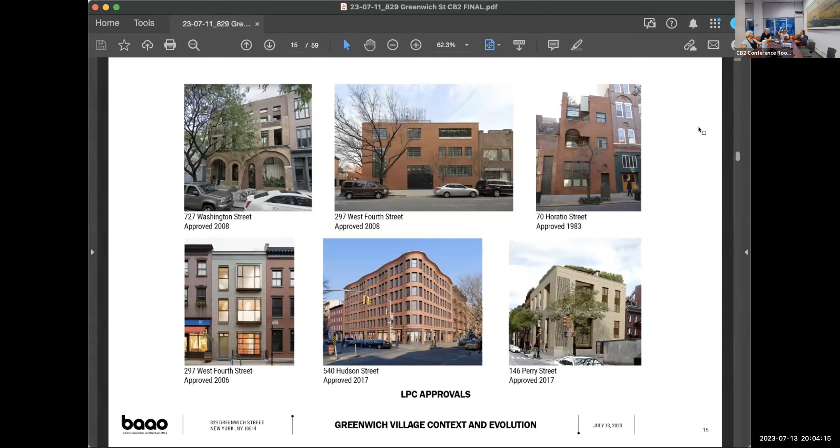Yeah, I think the windows in and of themselves, outside of the context of the historic district, are elegant. But in the context of the historic district, compared to all of the examples you've shown, I see the windows here first when seeing the proposed facade. There's no doubt they're elegant and an elegant treatment.

And I can see from some of the examples that you've shown where it's just a bit more subtle, the rounded. There's one specific that really stood out to me, I think it's on their page 13. I just have it zoomed in, where on 114 Waverly Place, I can see where there's a slight curvature, but it's just a much more subtle treatment than what you proposed. It doesn't stand out on its own. It's kind of a detail you discover upon looking closer to the building. Thank you. It was a great presentation.

Oh, Jonathan, did you have something to say? Well, about 114 Waverly, I understand the point. I would also say, though, that even within this facade, there's a number of different curvatures that come into play. And in fact, the window, maybe you can't see it that well because of the tree, but the window at the top is a very large, partly arched window. And so I think that is a relatively bold introduction of this kind of sinuous form.

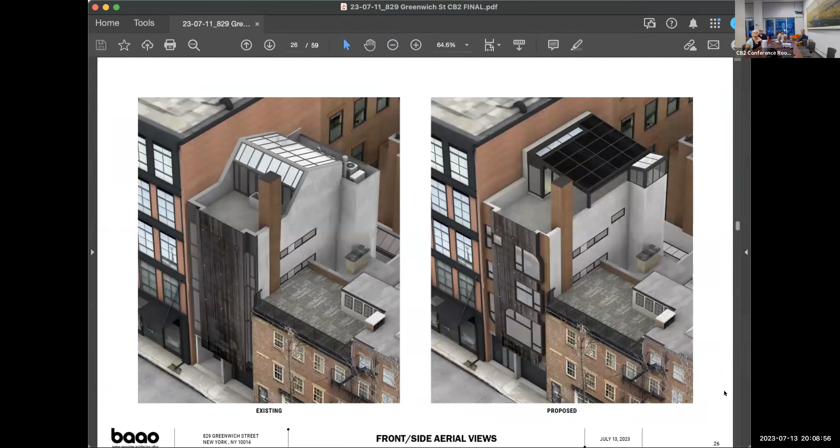And the box that we see? That was the greenhouse. Well, that I think is really unnecessarily big and obvious in your mock-up. Maybe we should look at the mock-up page, because I do feel like the sloped shape of the south side was pretty big. Now it was gray, so maybe that's an issue, but we're bringing that down from the height that it was, and I guess it's a bit of a trade-off, because we're lowering that area in the foreground, but then we have a little bit of a higher piece in the background. Why do you need a greenhouse?

To be clear, it's in the left-hand picture, it's the mock-up that's bright pink we're discussing. Is that correct? Yeah. So obviously the existing skylight, which is going to be removed, is kind of in the way of making an exact mock-up of the canopy. I'm talking about the new glass house in the back. You see the box in the mock-up, and on the right that's rendered into what the materials would look like. And I'm questioning what you're calling a greenhouse, why that is so important that it really ruins your other decisions.

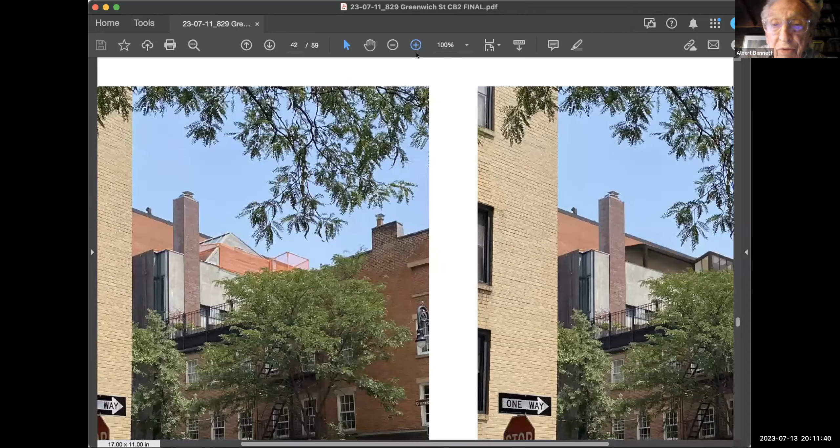Albert Bennett. Yes. The problem with that rooftop structure in your existing with proposed roof is that it's so very dark. And that is a greenhouse and it is all very dark. That's not the greenhouse. Those are the solar panels. Yeah, there's two pieces here. But the panels are just the roof, right? There's a flat surface on the roof that are the solar panels. Sloped. The panels are not vertical. The panels are just horizontal.

Am I correct? Yeah, the panels are facing up on this canopy, so you don't see the panels here. But the framing, I see what you're saying, this is just the posts and the framing of the greenhouse and the canopy. They are shown in a dark finish. Very dark, yes. And is that true of the ceiling of the structure as well? The ceiling is supposed to be wood, but obviously we could make it all a lighter material for sure.

It's very modern, obvious. Well, it is modern, the whole building. It's a modern building. I'll just reiterate what Alex said: there is a highly visible angled volume up there presently. So I think the net change in visible volume up here is not really changing all that much.

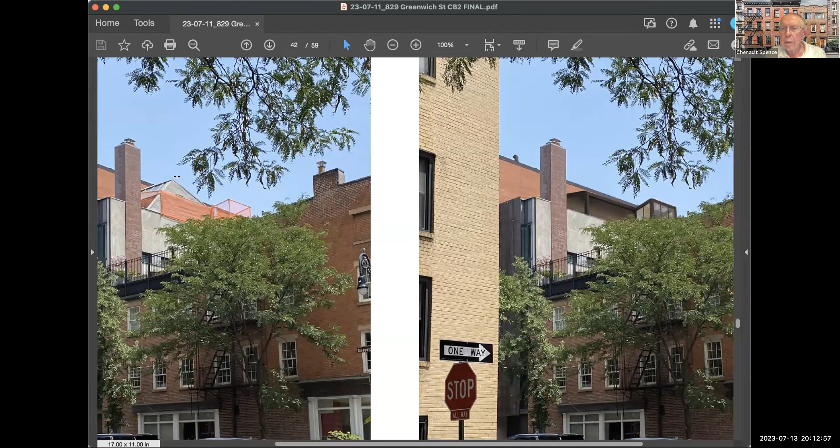But right, the front part's going down, the back part's going up, but the materials are changing. And we understand that. Yeah, okay, so can we move on to some other topic? All right, is that it for you, Albert?

I would just like to comment, I agree with the other committee members on the facade and whether it is at all appropriate. It is within the Greenwich Village Historic District, correct? Yes, it is. And the building itself was approved by the commission in 2003. It was approved. Okay, because it's right on the border. It's hard to tell from the maps. Yeah, the next building to the north is in the Gansevoort Historic District.

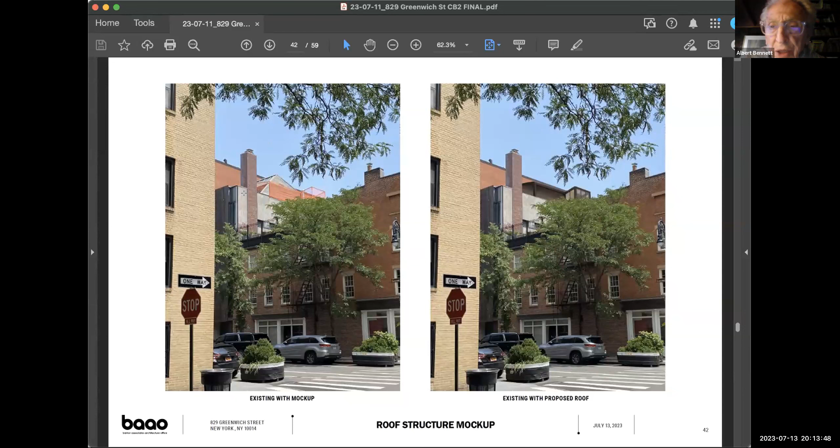Okay, well, also thank you very much for paying so much attention to the ecological aspects, replacing all the gas with electricity and particularly with the solar panels. So thank you for that. Thank you, Albert. Brendan Fitzgerald.

I think Albert might have answered my question. I thought this was the Gansevoort, which is a different designation. So that's what I was gonna mention, but it's irrelevant now. Never mind. Thanks. Donna Raftery. Hi, Donna. Hi, thank you.

Yes, it is in the Greenwich Village Historic District, but it does border on the Gansevoort Market District. And I think that when this was first done, part of the reasoning was to bring in some of that industrial feel. You can see the greenhouse on the top. I live right around the corner from here. So in terms of the rooftop, what's there now is visible from the street. Whatever they're putting there, you'll be able to see, but you can already see something. So the way they're describing it seems pretty accurate to me.

I agree with other members of the committee that this facade does not work for me. I find it very busy and not representative of much around there. And I really would urge you to go back and reconsider this. It's just extremely busy. The curves, you're talking about 70 Horatio, that's one arched opening somewhere. So I'd really like to see you go back and reconsider all these openings. It just seems extremely busy to me. That's it. Thank you, Donna.

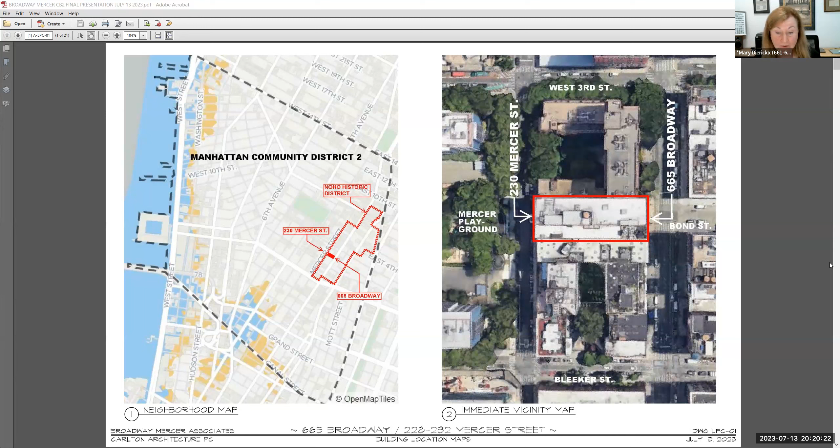Just reminding you right at the beginning, there's a grade change from Broadway to Mercer, with Mercer being lower. And we're proposing steps, and many of the buildings have steps on Mercer leading to that higher first floor. And we're going to see examples later. Next. Here are the two buildings. They were joined internally a long time ago, sometime between 1921 and 1954.

The one on the left was built in 1891 to 92, designed by Brunner and Tryon. And the larger building on the right was built in 1911 to 1912, not that much later, and designed by V. Hugo Koehler. So on the left are the Broadway facades, and on the right are the Mercer Street facades.

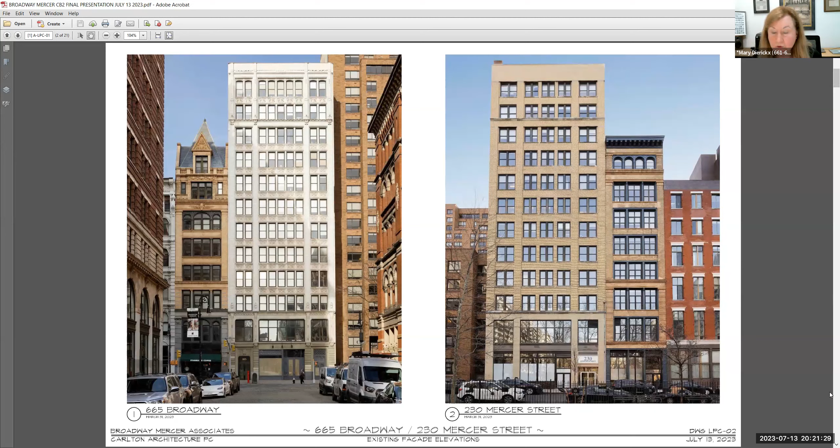The scope is to replace the north 665 Broadway storefront in the bigger 1911 building, including restoring the canopy and adding signage, which we're not going into. On Mercer, both storefronts and all the doors will be replaced, and two sets of stairs will be added, and also new signage. The rest are public hearing items.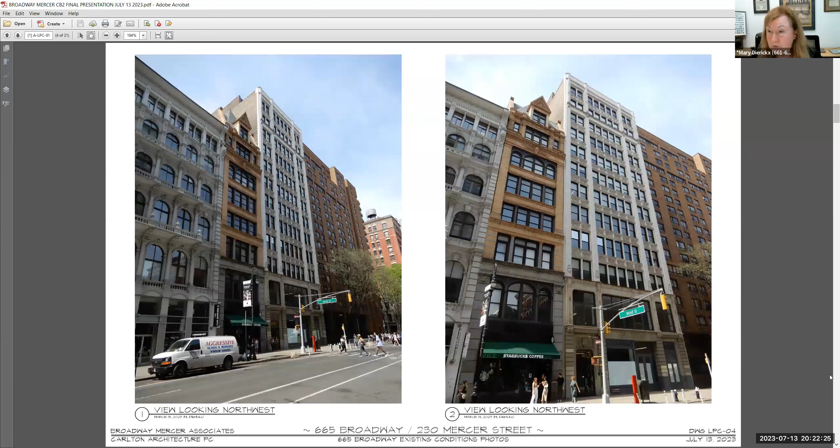You can see there's a canopy over the storefront on the 1911 building. We're going to try and restore that, and we're going to try and not restore the storefront, but bring it back more to the way it looked in 1940, which was probably closer to the original, if not the original. Next, we're going to talk about Broadway, then we're going to talk about Mercer. So here are the Broadway buildings. Next. The storefronts are modern and have undergone a lot of alterations. Next. Mike Carlton is going to describe the conditions.

Okay, so this plan indicates the connection of Broadway to Mercer Street on the left. 665 Broadway is the larger building on the north, and the smaller building to the south, known as 228 Mercer in this case. The grade change very much guided a lot of the design approach here, and we just want to reinforce that by looking at this section through here.

We can see the Broadway first floor level is in line with the sidewalk, but by the time you get to Mercer Street, there is a 30-inch difference between the sidewalk and the first floor level. In addition to that, this area of Mercer Street, which is the north corner, is the electrical switchgear room for the building, which makes lowering the floor in this area an impossibility.

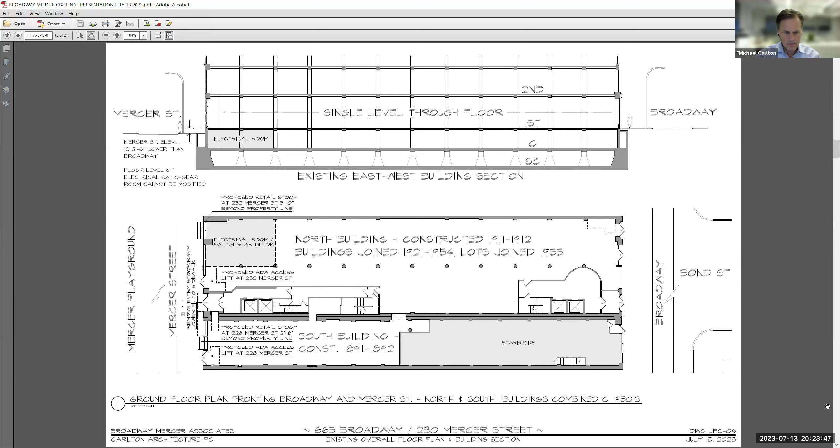Starting with the Broadway side of the building, the top elevation is the existing conditions of the facade that we're talking about. So it's this center section here that is proposed to be replaced, as well as this grille section here, neither of which are of any historical value. The central show window is much more in keeping with those 1940 tax photos, and as Mary pointed out, reintroducing the canopy that you see there in the photos as well.

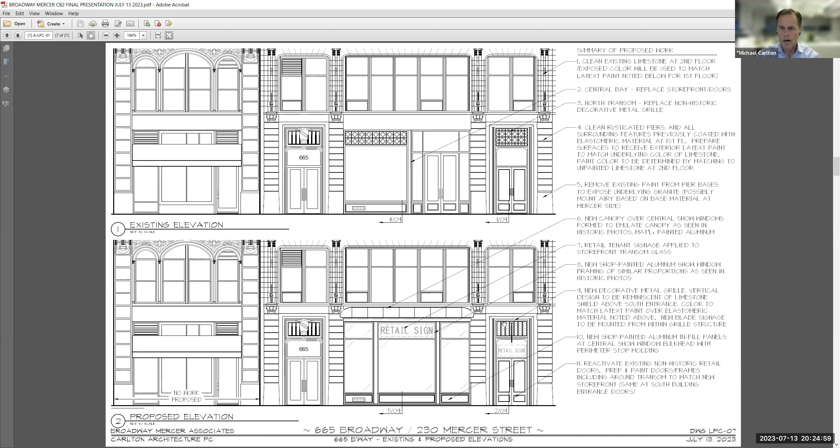On the replacement of the transom, we would be looking to replace it with a simpler grille that picks up more of this verticality of the plaque that's above the transom window here. We do have requirements for ventilation that we need to deal with. We're not trying to recreate the grille to the left. We're simply providing a nod to its history.

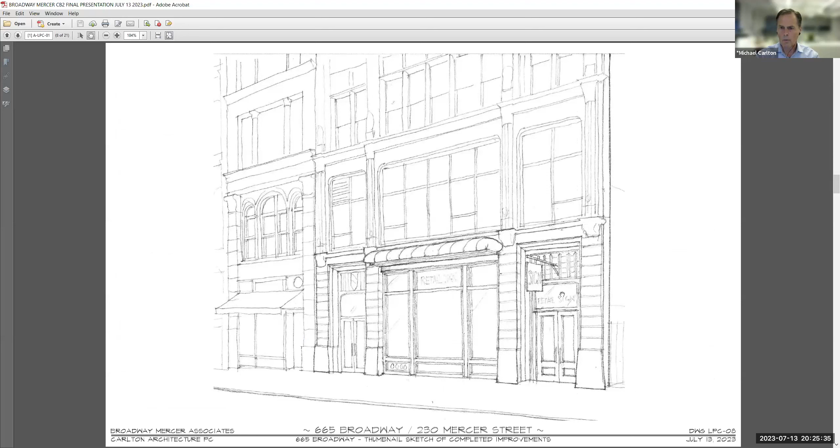Just to put it all in a little bit more context, just a thumbnail sketch that I think better illustrates the three-dimensional qualities of some of this. So here again, we have the canopy, the show window below with the bulkhead similar in scale to what you see in the 1940s photo, and of course the doors on the right side with the new grille in sketch format.

In terms of the finishes and details for the Broadway side, we have a section of the existing Broadway at the transom or the entry there. So this is the portion of the grille that would be replaced. We'd be keeping the existing doors that are there currently, pulling the grille back and putting a new decorative grille. And again, at staff level, we'd be talking about some retail signage, and you can see the profile of the canopy in the background there.

To the right of the finished materials is the actual section through the show window, showing the mullion system, the bulkhead at the bottom, and the canopy again in section, which would have a continuous light feature to evenly wash the show window. The materials that we are looking to use here is to get away from all of the black that you see there now.

The facade would be cleaned. Where necessary, it would be painted. General coloration goes back to the limestone of the building. Repainted, it's coated with some sort of Prosoco, some sort of Thoroseal product. And the bottom piers, the granite would be restored in that case.

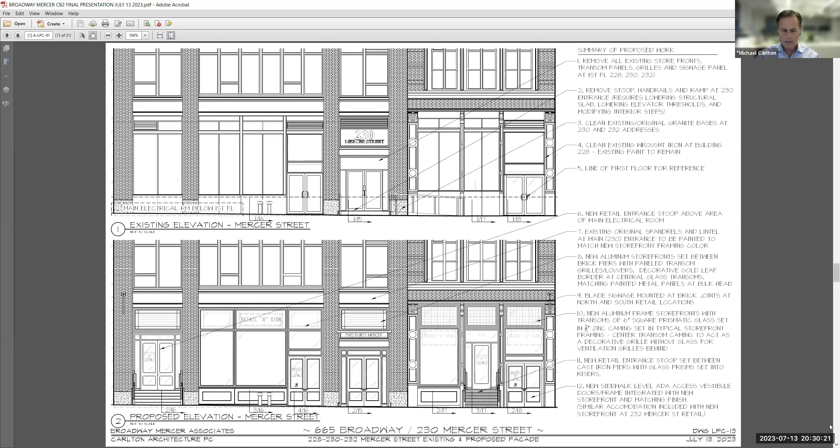Similarly, on the 228 Mercer building, as stated earlier, we are introducing steps to overcome the height difference, but we're providing a vestibule with protected access to a lift, again, dedicated for only that retail space. And again, just a thumbnail sketch to illustrate what that starts to look like in terms of the streetscape.

The stoop cast iron at the 232 Mercer Street side, that projects from the building line 36 inches. At the 228 building, because of the setback nature of the cast iron columns, we're looking at that being a 30-inch projection from the face of the building. And the marquee. And so the new entrance is topped with a new marquee canopy. Again, nothing of that marquee comes in contact with the surrounding brick. It's all designed so that it is supported from between the piers that we're looking at there.

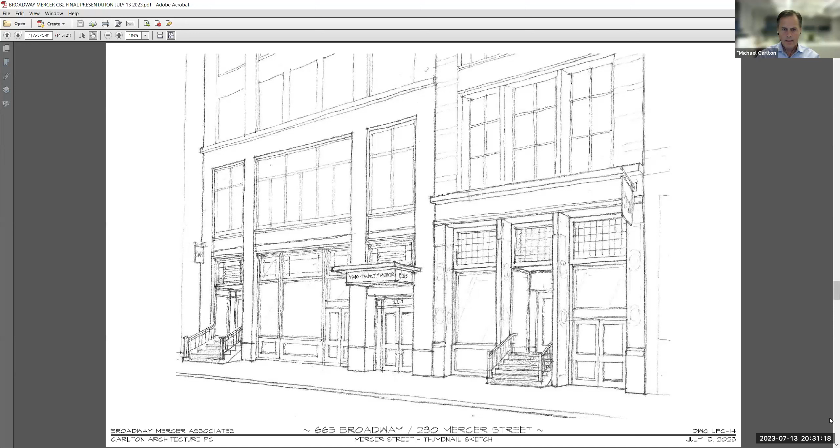So again, starting with the main entrance to the building, the office building portion of that. This is an existing section showing the step up from the sidewalk level, where beyond that there is a ramp. There's a vault structure here that would all be modified as shown in section number 2, where that comes down to the sidewalk level. We retain this existing decorative lintel that you'll see that was in the photograph, and everything happens below that, basically taking out only the storefront.

The materials at the Mercer Street side of this building are meant to unite the Broadway side with the Mercer Street side. So again, we have the presence of restoring the granite at the bases here of the piers. On this side of the building, the main facade is this painted brick, but it works well with this medium bronze color that would be all of the new metal finishes throughout.

In this particular case, and we'll get to it in the next page, because of the tightness with the stoop to the electrical room, we're looking at having closed risers with lighting integrated into the nosings, and then just some idea of the level that we'd like to see the project go to in terms of some historic decoration on the windows.

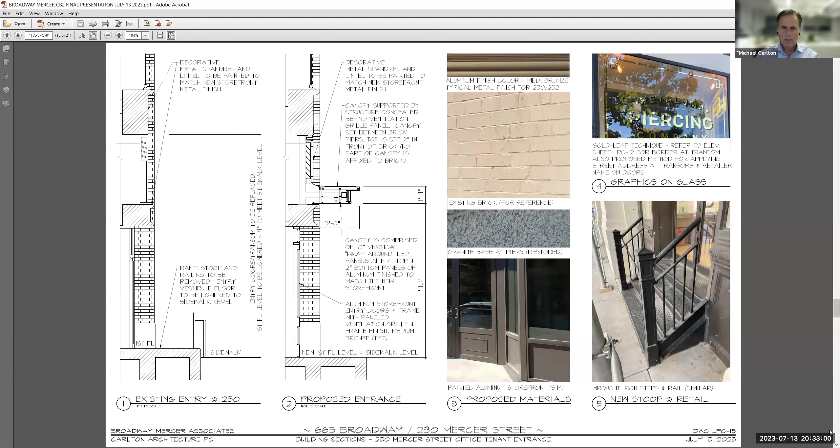So these are the existing conditions and proposed work for the retail space to the north. So again, this is a section that indicates the relationship of the sidewalk, the first floor, and that main electrical switchgear room below. So starting at the north side of the store, we're looking at the new cast iron steps, which lead to a 5-foot deep landing. And then that is into the store.

We have a roof, and we maintain the mechanical grills at or close to the property line level. And then we're showing the 3-foot setback or encroachment onto the sidewalk from there. Further south from that point, the details just really keep aligning, and we're showing here the show window aligning horizontal mullions similar to what we see on the Broadway side. A new aluminum frame metal panel, again finished to match the storefront system as a replacement for non-historic polished granite panels that currently exist in the space.

And then further south within that small area, that portion, now that it's not over the main electrical switchgear room, would be able to be modified where the floor would be lowered enough to the sidewalk to accommodate an ADA lift. Again, that would then enable the patrons to move up to the first floor in a similar fashion.

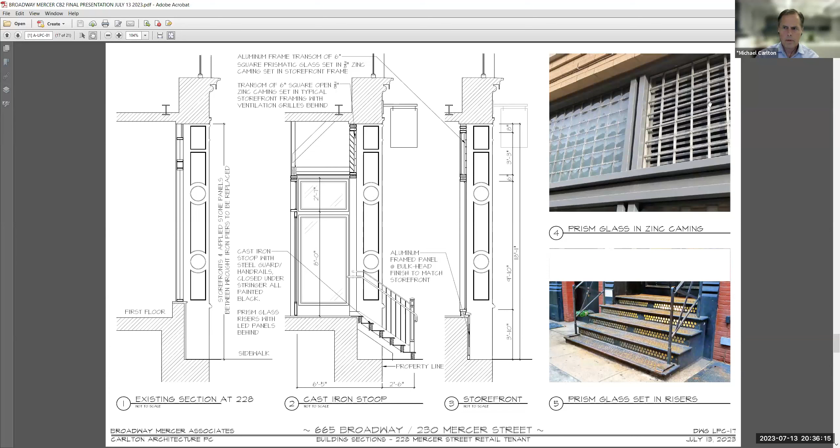And starting with the center section of that, we would have the setback landing at the top of a cast iron stoop. In this case, we have enough room where we'd be able to integrate the embedded prismatic glass at the risers. Above that, we are reintroducing 6x6 prismatic glass panels similar to what you see here in a zinc frame, and also similar to this to accommodate our ventilation grills in the middle. We would continue that zinc grill as a decorative element in front of the ventilation grills.

And then finally, the 228 building would also have accessibility integrated with it in the form of a protected vestibule with doors at sidewalk level, modification to the first floor level to allow for that lift, and then into the building. In terms of finishes, we are proposing to maintain the existing color of the cast iron and simply clean it. The storefront material and the other various metal pieces would be painted a slate gray finish, and again be similar in quality to what you see here in this photo.

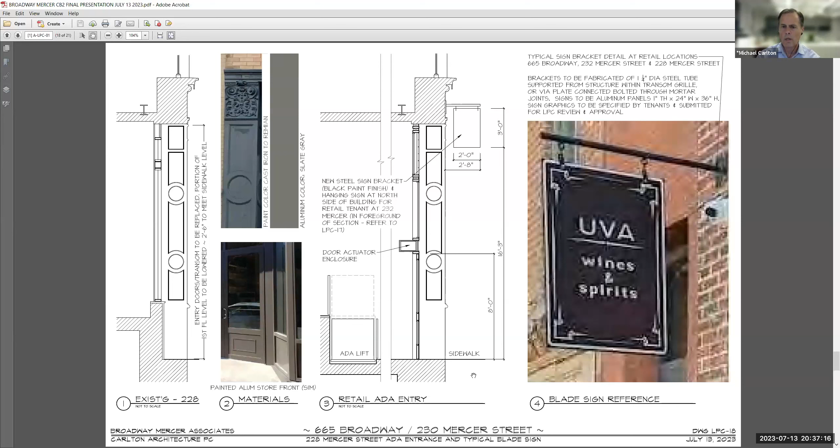And just in terms of signage, again, something that would be dealt with at staff level at Landmarks. Suffice to say, all of the signage would be in accordance with Landmarks requirements. Okay, back to me. I do want to say that we have no historical evidence that prismatic glass existed in the transoms, but we think that it is something that could have happened in an 1891 building, and you can see that in Ladies' Mile, although really there's not that much in NoHo that kind of relates to that. And we don't have historical evidence because people didn't take photos of Mercer Street.

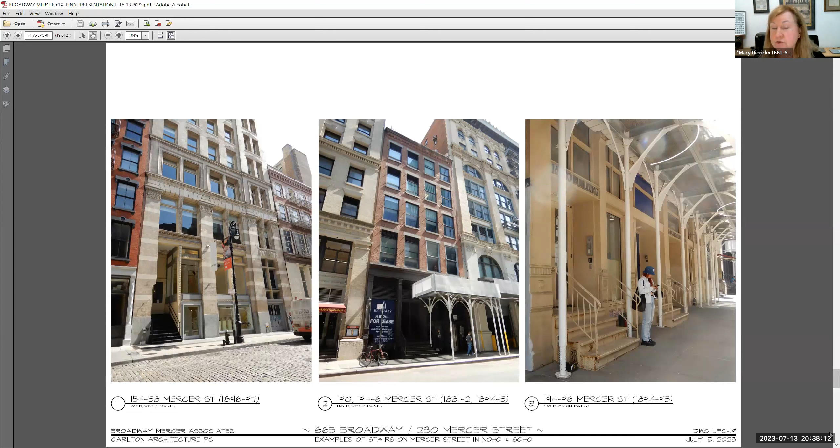We think this is typical of Mercer, and while they were not on our two buildings, they are something that is typical of the streetscape. And one of the ideas of this project is to enliven that area, the streetscape. The two buildings are a little bit bland now on the ground floor, and we're looking to relate them more to the historic buildings to the south, and make them more a part of the surviving historic Mercer Street.

Next. And that's our presentation. Thank you. Thank you very much. I have a couple questions.

The lift, are they in only one or two places? Those are in two places. Okay, could you show the picture of the first one? I'm not clear where it stores in it. Okay, so if you're looking, just show on this sketch. Yeah, on this sketch. So on the right-hand side, this is the Mercer Street sketch. So where my cursor is right here, that is the entrance vestibule for the lift for this retail space here. And on the right, these doors are the entry vestibule to the lift for this retail tenant.

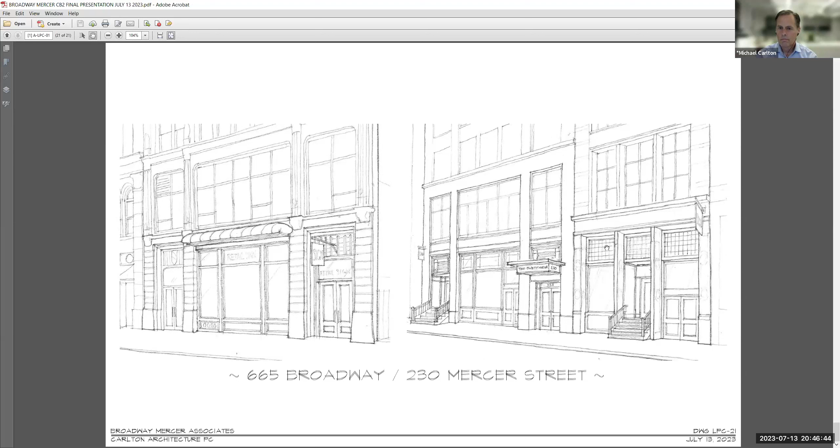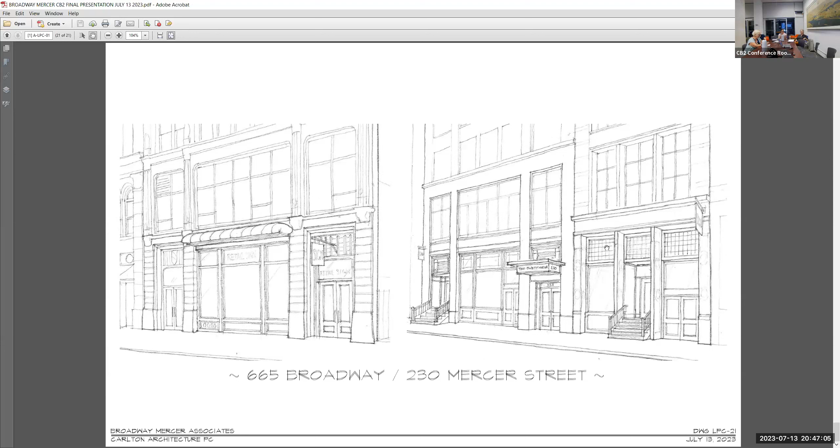All right, there are no other questions among the committee or the board. Are there any members of the public who wish to speak? Eugene and Chenault, there are no raised hands. So everyone who wishes to speak about any application has spoken. Is that correct? So it would seem. It would appear so. Okay. Watching carefully to see if there's any last. Thank you very much. We'll move on. Thank you. That's it, Mike.

Wait, there was a hand. Pete Davies raised his hand. Pete, I am promoting you to panelist, so you can rejoin the meeting. Okay. I will permit you to speak.

Great. Yeah, I just wanted to point out that our building at 546, 548 Broadway in the transom has, I believe it's prismatic glass across the entire storefront. I will put a link to Google Street View in the chat. That was discovered when the facade was redone about 20 years ago. They stripped off the old and found above the store windows the little glass pieces.

I'm not sure if it's actually prismatic, but if you look there on that link, you'll see it all across the front there. Thank you. Thanks, Pete. Yeah, thanks, Pete. That's great. Okay, Susan, is that it? That is it.